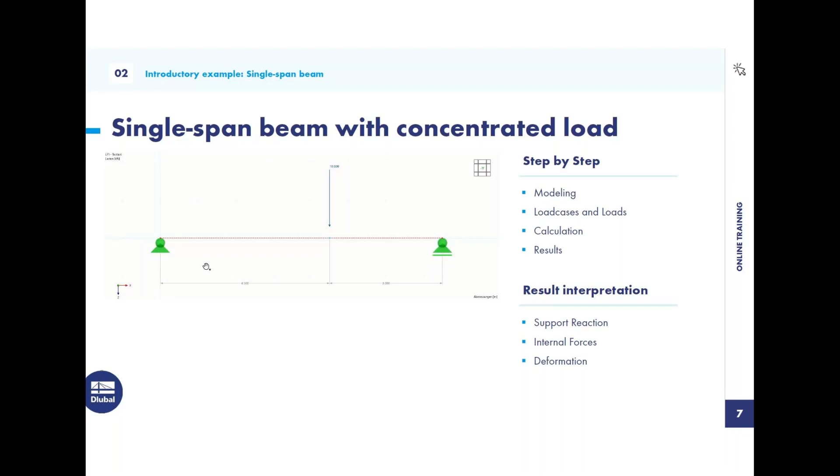So maybe let's switch to RFEM. Okay, back to the user interface. So for example, when we want to create nodes, that's the beginning of every modeling.

Nodes are the beginning, and on these nodes you can put lines or members, and surfaces need these lines at their border.

So for example, with nodes, you can start here in the navigator data and click for a new node. I'll show you - you can also use the menu basic, or nodes there, or in the table you have an option with coordinates to create nodes, or even here in the shortcut.

So you see you have different ways to do modeling, but okay, let's start. I will close this, and then let's start with a new model.

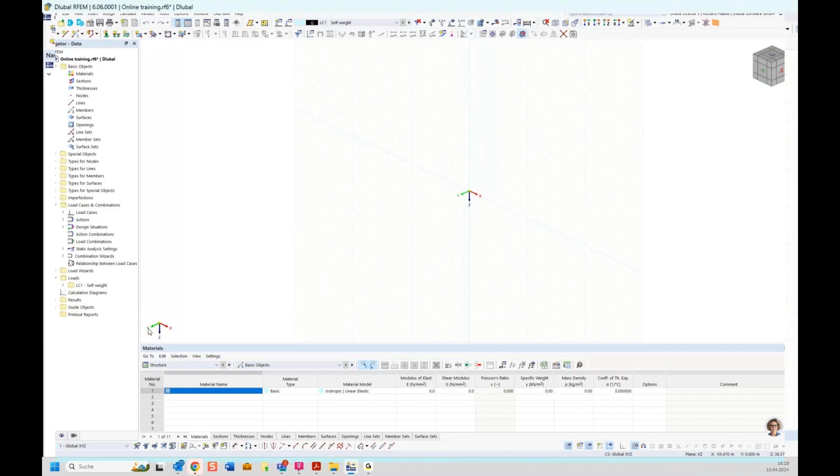Okay, maybe to the view cube before we start modeling. You can left click on this cube and you see you can switch the views. As I said, it's connected to the global axis system, so you see the Y direction when I click on Y, or when I go to X.

The same idea is here with views in X, Y, Z, or you can choose other directions. Another option is when you press Control and the middle mouse button, you can also turn around here. Okay, but let's start with the modeling.

Our system has a 7.50 meter long single span. So let's begin with the nodes. I choose the shortcut here and click on the 0,0 coordinate with the left mouse button.

Now we have our first little problem. When I go here, we see 4 meters, and here, 5 meters. But we want the node in the middle. Now we have different options.

First, I can click on this node, and in this case it fits perfectly because we start at the 0,0 coordinate. Then I could change the X coordinate to 450 and say OK. Now you see it's at 450 how we want it.

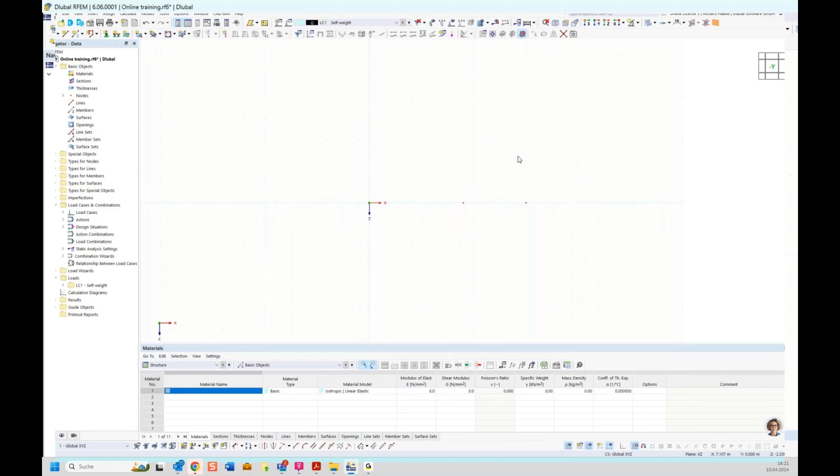Then we need the last point at coordinate 750. Let's do it this way. And maybe I set it back to the default setting. You can also do it here. So now we have 3 nodes.

Maybe I showed this before - when you left click and go from left to right, you see it in orange color, and from right to left you see it in blue. Maybe I'll continue first with a line. Let's go to this node, to this one, and again to this one.

So when I go from left to right with this orange color, for example over this line on this node, you see only this node gets selected.

But when I go from right to left, you see the line and the node are both selected. So you have these two options. The orange color only selects the object which is completely within this rectangle, and with blue you only need to touch a little of the object and it's selected.

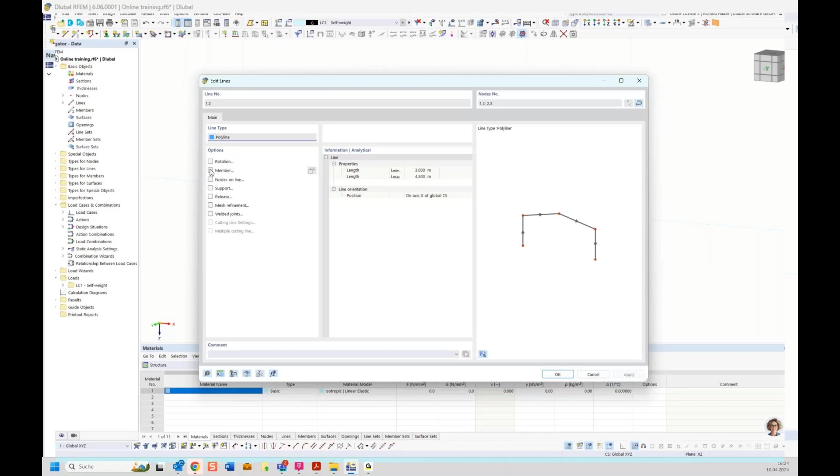So we have this line and we want to transform this line or give it some properties, and we say we want to transform this line to members. Then a new menu opens, the new member menu.

What can we see here? A member type. The beam is, I'd say, the default type. The beam gives all forces to other objects.

For example, when we go to tension, you can always orient yourself with these pictures. So we see here all forces at the beam, and for tension you see only tension forces can transfer to other objects.

Same for compression, here it's only negative forces. But let's go to another member type - here is a definable stiffness. Maybe it's interesting for you in your study time.

There you see we have a new tab here, definable stiffness, where you want to create a new stiffness type. Here you can manually define all stiffnesses - torsional stiffness, bending stiffness, and so on. Maybe it's perfect for your book exercise, and you can manually create your beam in this way.

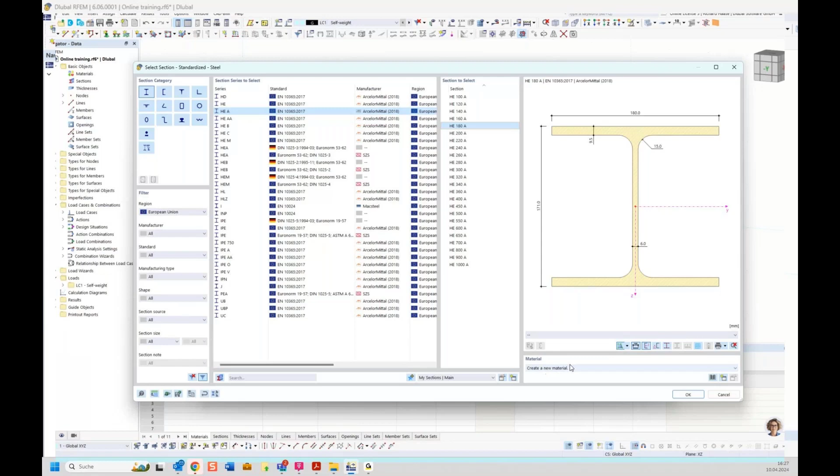Now you see this yellow color because we haven't created a material yet. So let's create one. There's again a library button.

Okay, let's say European Union, material type steel. And then you see, oh my God, so much steel. How can I find my steel I'm searching for? You see here this searching function, and let's say take an

S235, and the shown steel options are reduced. Here you can see, okay, let's take such steel, say okay, and you see the yellow switch to the blue. The blue stands in our program for steel, and we say okay.

Now we have an HEA 180 with the steel S235. Say okay, and okay. And now we can see our property-less lines are transformed to such members.

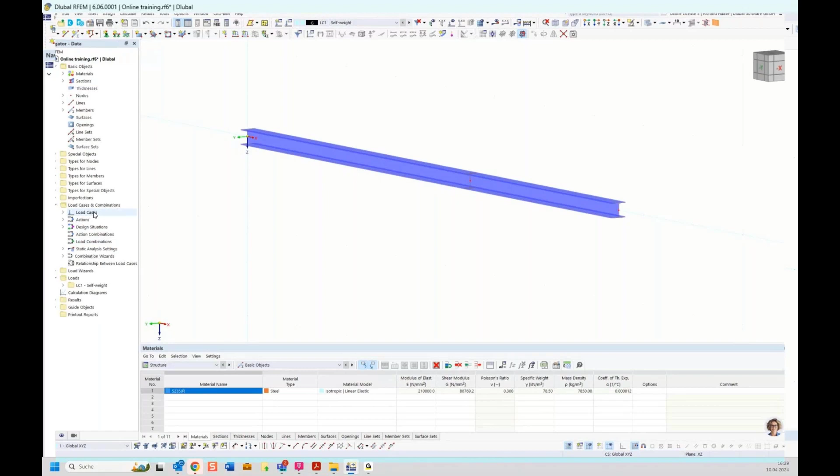Okay, so what we need are the supports we have here and the loads. But before modeling this, I will give our AI assistant the chance, and she will calculate, and then we can compare the RFEM 6 results to the results of our AI assistant.

I copy from my document. Okay, I say here a single beam with length of 7.50 meters with a single load at 450 with 10 kilonewton, and I want to know the bending moment at a length of 450. And yeah, then we start, and Mia shows us how good she is with her statistical knowledge.

So in parallel we can model the nodal supports. There, okay, when we go to this button, you see the degrees of freedom, the translational and the rotational. And yeah, we say okay, in X direction and Z direction fixed.

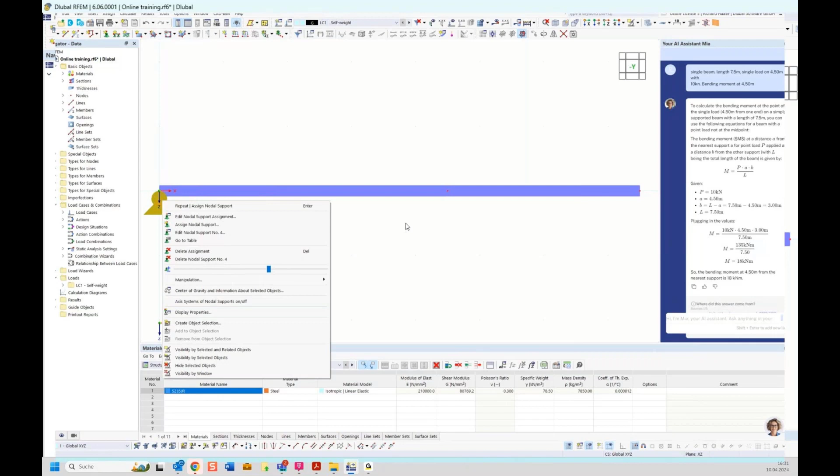We want that on the left side. Say okay. And you see, maybe when you click with the right mouse and this button, you can increase the size. And okay, we need another one. We say we need here a nodal support with roller properties, and we say this. Take our point. Okay.

And yeah, what is missing? Maybe to control the length again, you can click here for dimensions. Okay, didn't I click on my first node? Oh, that was wrong, sorry. Let's go linear on this node, and this node. Yeah, then we must see the plane, and we must choose here the second plane. Okay, that's fine. And we see, okay, our length 4.5, 3... We have our control, our 7.50 meter long single span.

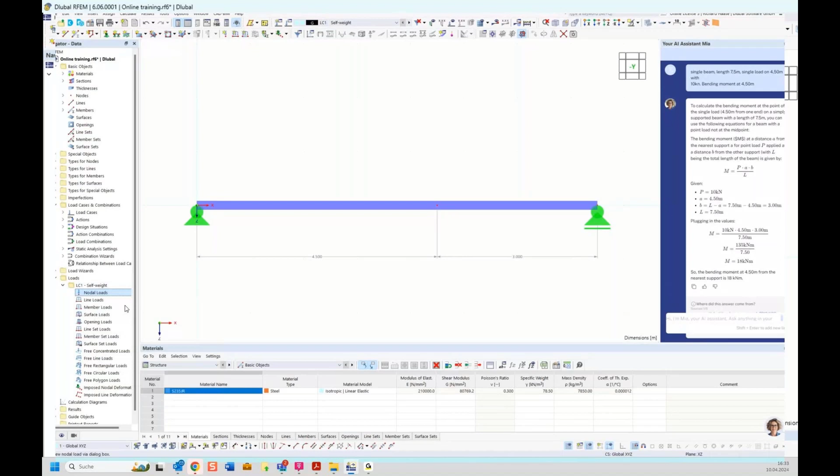And yeah, now we need our nodal load. Then we go, or we have here the option loads, nodal loads. But yeah, you already can do it here in the shortcut, new nodal load, or even loads, nodal loads. So you have everywhere, also in the table, you have the chance or the option to model in different ways. So let's do it this way, a new nodal load on our load case self-weight, and take this 10 kilonewton, that direction, or fit. Okay, on this node, say okay.

And now we will check what Mia has calculated. She says, okay, at this point with formulas, and you can control it, we should get 18 kilonewton meter as bending moment at this point. Then, okay, let's check it.

On this button, you can start the calculation. For this load case, you also have the option here on calculate all, or when you have more than one load case or a lot of load combinations and other things, you can see here you can select what the program should calculate. But okay, global deformations, you see here the navigator results is new because we have calculated and have some results here.

But we want to go to the members, internal force, and to the bending moment My. And okay, Mia says we get 18 kilonewton meter, and our program says 20.4. So who's right?

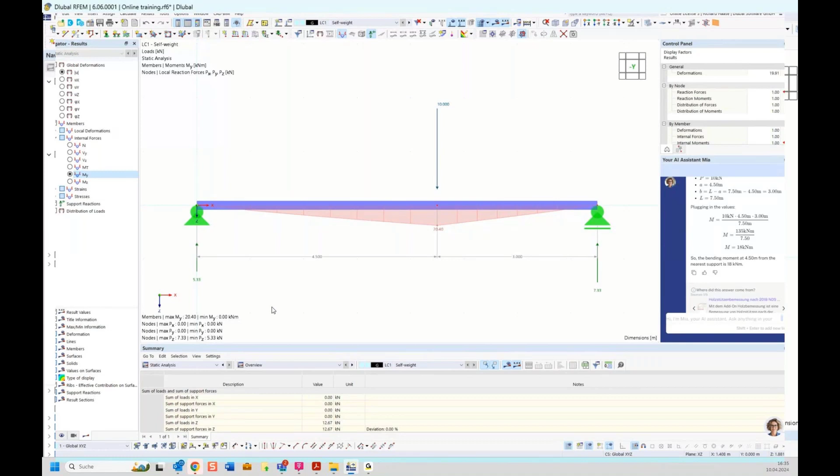We must prove some things, and the reason is why, for the load case self-weight, when we go to edit, here we have an active self-weight in that direction. So we have created our steel section, and this steel section gives its own self-weight on the structure. The default setting is that it's deactivated, but I'll show you how you can activate it.

We go to the navigator and here to the display. Then we have here the loads and the self-weight. Okay, and you see here the 0.356 is self-weight of this HEA 180 profile. And that's the reason why the results are not as expected. So let's deactivate here the active self-weight and calculate our self-weight load case again with our nodal load.

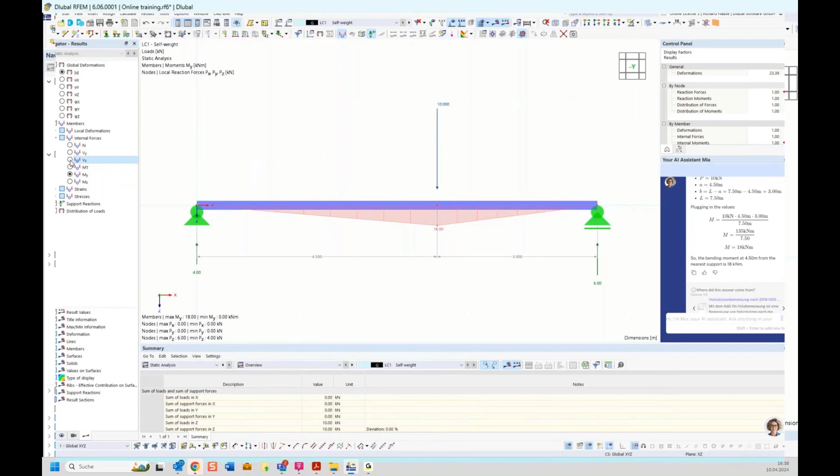Good, then we have this, the internal forces. On one side we see here the My, but we also can see here the shear forces, let's see, 6, 4, and also the deformations. And that's the options, stress strains, and you have a lot of options of the results to see them.

Okay, that's enough for my first example. Then let's go to the next, a two-span beam with alternating load positions. So we will create more than one load case, we will do 3. And then I will show you the combination wizard from Rfem 6, when you have different action types like self-weight and snow, wind, and so on, and how we combine it with the gamma and psi factors.

Okay, and another things, but let's start with the modeling of our second example. Okay Mia, thanks, then I will delete my model. And we have 10 meter of the whole length. So you have the options with the nodes and with the lines I showed you before, but there is also a faster option.

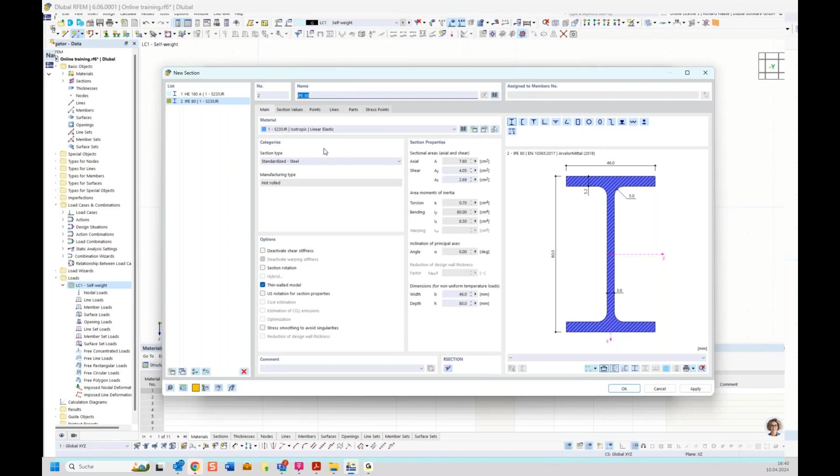Okay, we have a HEB 300, and now you see the fitting standard. Let's take this with the Euro norm, and we say OK. And from 0, we want to go to 10 meters.

You see, it's a faster way than selecting the nodes and then the lines and transform the lines. So what I want to show you is the principle of Rfem 6, because behind this member is all the time the nodes and the lines, but that's the much faster way.

Now we have a single span, but we want a two-span beam. So we click with the right mouse on this member, divide member, and the distance. Now you have the option between percent and meter, and 50%, 5 meter, that's exactly what we want. So we divide our member and have now two 5 meter beams.

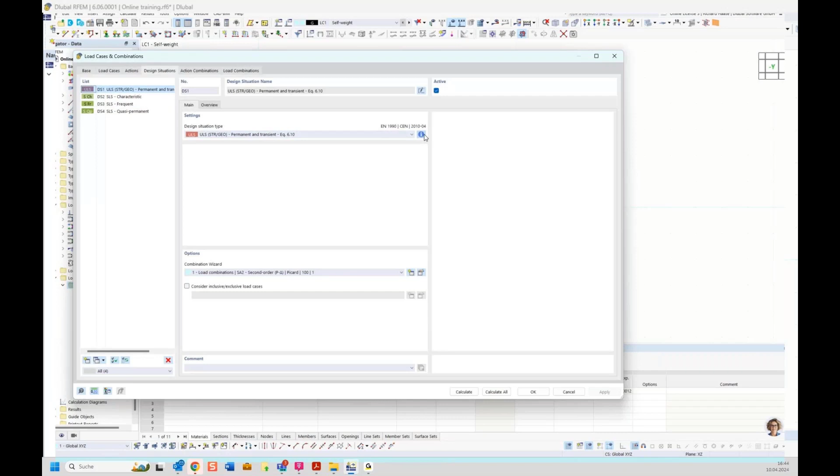Let's have a look at our ULS. So here you see Eurocode and information, the combination rules with this gamma and psi factors. Now we see he combines the actions, the A1 and A2 of our self-weight and the other action, and here the load combinations.

Okay, maybe here it's not so interesting, but I have another example where we have more than these 2 load cases. But you can see here he combines after this rule all load combinations.

Okay, that's okay. And now for our load case 1, we want to create a new member load, right click, and have 2.5 on both members. And you see, okay, he created it. And for the left, the same new member load, on the left field we want 5 kilonewton per meter, say on the left field. And now I could press the OK button, then close the load option here.

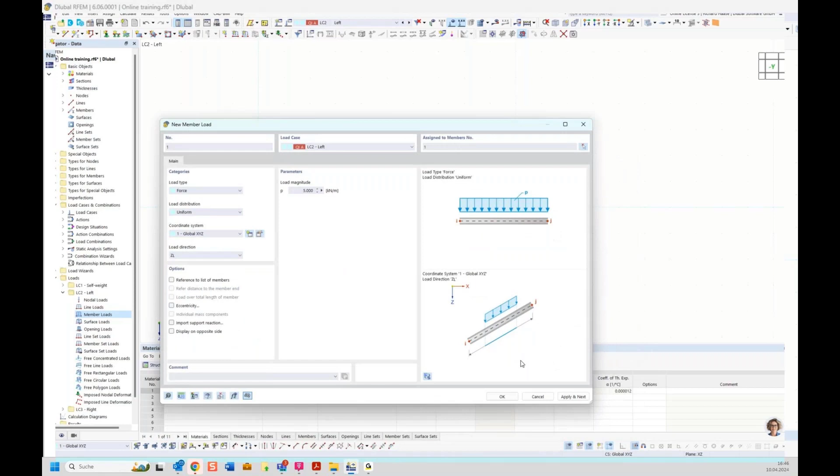But I want to continue with my right field. So when I click here, apply and next, I can see it was created, and I can easily switch to another load case. The same with 5 on the right field, and say OK. Now we are ready with our loads, and I close this with OK.

And we can control it. We have the self-weight plus the self-weight of the HEB section, but I have deactivated it - you can activate it again. Then our left field load, and on the right.

Maybe when you make controls with examples from literature, it could be possible that you get other results than in RFEM 6. And the reason, I'll show you.

You can see it in the sections. You see here this option, deactivate shear stiffness. The default setting is that RFEM 6 calculates with the axial and the shear stiffnesses, but in literature examples, most of the time the shear stiffness - they don't calculate with this kind of stiffness. So you can click it here, deactivate it, and make the shear stiffness infinity.

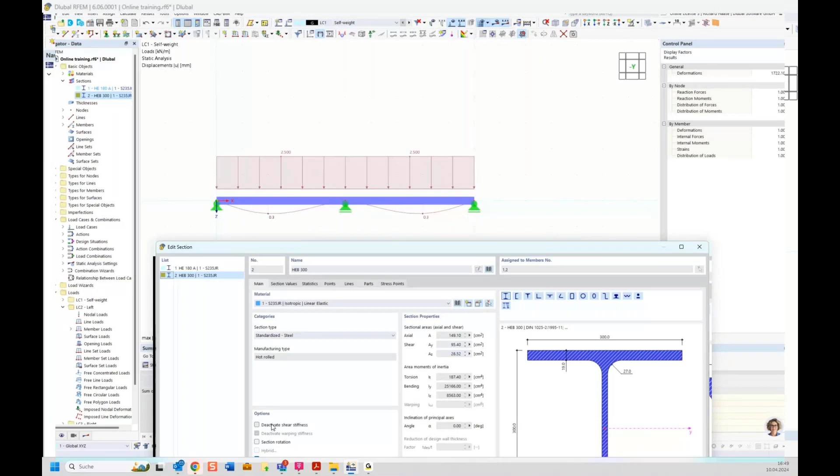So when we see the deformations, we have 0.3 millimeter here. And when I deactivate the shear stiffness, making the shear stiffness infinity, let's see - we have 0.3. Say OK. We get only 0.2. So the system gets more stiffness because the shear stiffness is with an infinite size.

So you must know this if you calculate with literature examples. Then deactivate it here, but I'll leave it active for our example. Okay, good. Then let's calculate all.

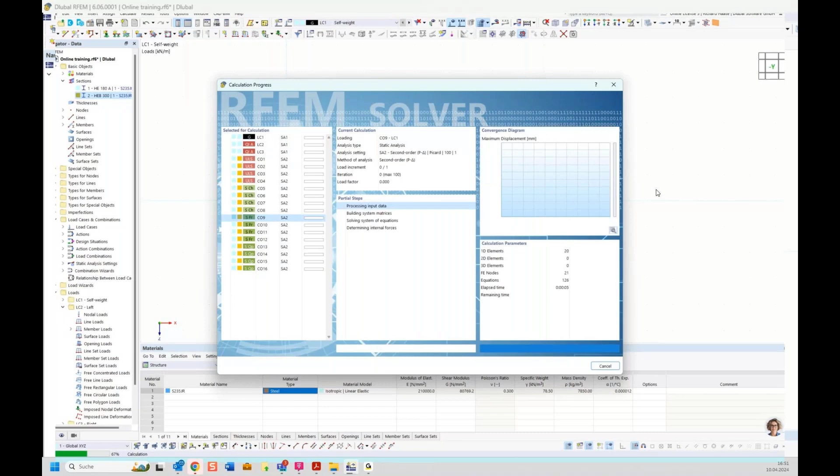And then I'll show you the results and explain something. Maybe we can choose the wireframe model here - it's then better visible.

Let's see the bending moments. We can also deactivate our self-weights, our showing loads. Okay, and we switch to our design situation. Now we see we have max and min values here, and why we get it in this design situation.

The reason, I'll show you how he creates these combination rules. Here for the ULS, you see he has 4 combinations in this case. And out of these 4, at every location, he shows you the min and max values.

So now we want to know where this result comes from - this minus 37, which combination gives us this result. Therefore you go here to static analysis, results by member, go to internal forces, and now we're at member 1.

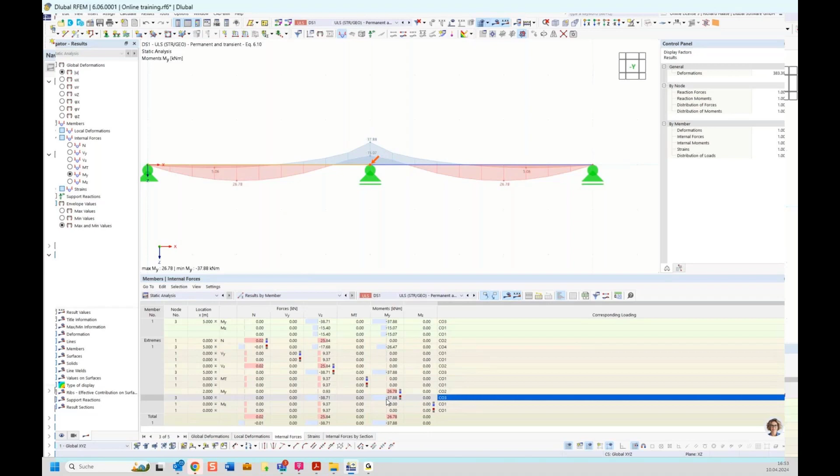That's right, at the end of member 1. Here are the extremes, and this blue and this red symbol show you the max and minimum values. So now we find our minus 37, and here is the corresponding loading. You see the combination number 3 gives us this maximum or minimum value of the bending moment.

So then let's prove it - combination number 3. Let's show the loads again, and you see we have factorized our self-weight, and here on the left and the right field loads. So it makes sense that this one gives us this minus 37 bending moment.

Okay, then let's check it for a field bending moment. So this 26.78, and you say it comes from combination number 2. And combination number 2, you see here our self-weight with load case number 2, and load case number 2 was the load on the left field.

The same you can do for the support reactions. So maybe deactivate the member results, and let's see our support reactions. Now we want to know where this 77 kilonewton comes from. Same principle - results by member, you must switch to results by node, because on this node is the support. Results by node, and switch here to support forces.

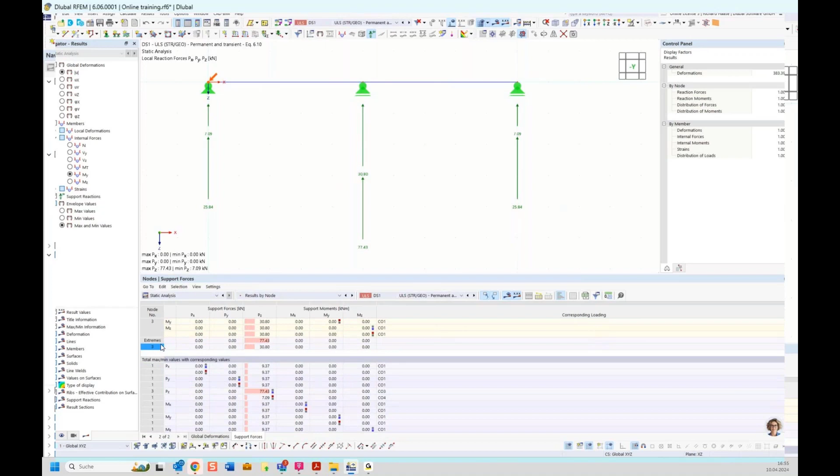Now, see here, that's number 1, and we want to go to number 3. And you can see here number 3, and here we have the 77 - also comes from combination number 3, and combination number 3 was, as you see here, self-weight, left and right field load cases. So that fits well.

Okay, that was the second example. Then let's switch to the PowerPoint presentation.

And yeah, the next example is a Gerber beam or hinged beam. This system is maybe the same as this 2-span beam, only here is a hinge, and through the hinge this 2-span beam gets statically determined. So it's a coupled system of a single span to a single span with a cantilever.

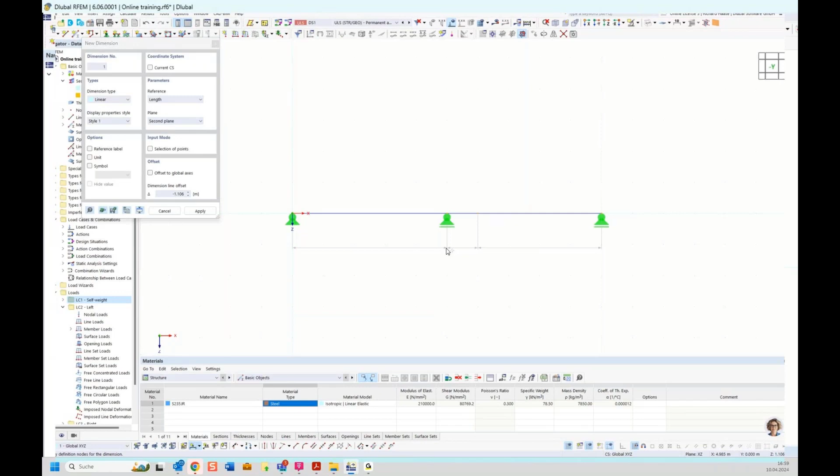And yeah, you see, say here, okay, maybe through the new GoToWebinar that the program said goodbye. Let's start again, Rfem 6, one moment.

And another point for this Gerber beam - you see the maximum field bending moment is exactly the moment over the support. And it's for the design check more easy when you have one size to choose for the section.

Okay. Oh sorry, I opened the German one. I switch back to English, sorry. One little moment please. Okay, now it's open. I think you don't save it. Okay, then let's close and make new.

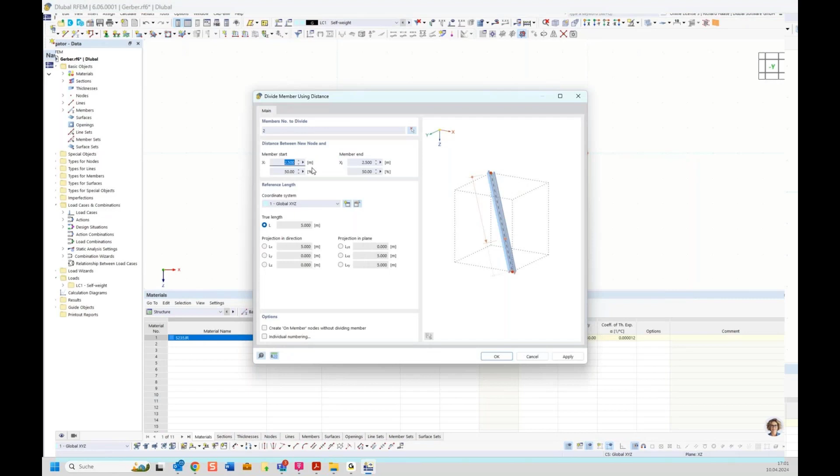It's fast, so let's say Gerber 2D. And we want again our beam - okay, so we say our 10 meter, divide this member with distance 50, and divide again with 1 meter. And our nodal supports - say here our roller, this one. Okay, a little bigger, okay.

So first, wait, okay, I will customize - oh wrong. Restore and set toolbars to default.

Okay, so now I show you how you parameterize your model. The command is here under Edit Global Parameters, so it's a little bit hidden. When you remember, I told you at the beginning that we have such a search function, and you can type global parameters so you can find it there.

Or when you're working more often with this command, you can customize your toolbar - therefore you go to View, Customize, Menus and Toolbars, and go here for global parameters. Every command you can find here or over this searching function. I want to say, okay, this global parameters I want to add in my toolbar - then left click, hold the left click, and I will add it here. So we have it fast to find.

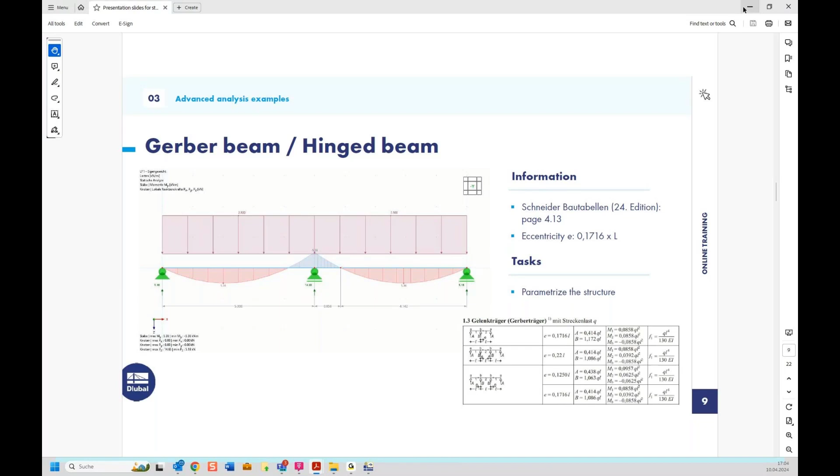Maybe - oh no, we can switch between value and formula. Let's choose formula here, and you see now our formula field here is available. Important is when you choose such formulas, you must use a dot instead of a comma, otherwise Rfem 6 gets problems to understand. So from our table book, it was 0.1716.

The field length, but this is only - it would be here, but we want to have our Gerber hinge here, so we must say another field length, and now we see, okay, it's at 5 meter, 858.

Now say okay, now we have our global parameters, and now we must connect our model with these parameters. So we go to, oh wait, before I forget, our dimensions. Okay, so good, maybe I save it - it's a good thing all time.

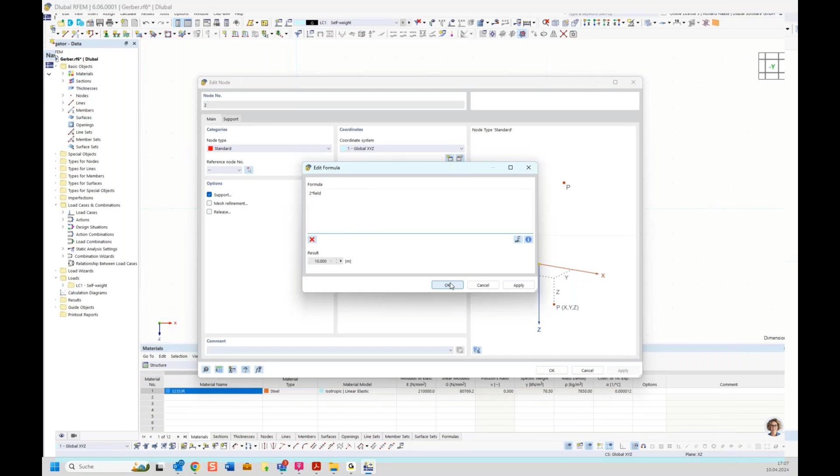Say here, and say okay, we want to edit the formula, and we say 2 times our field - that's what's the name of the global parameter. Say okay, and you see here 10 meters. That's right, okay. And now our Gerber hinge.

Let's say the global parameter again. We have our Gerber with the 5 meter span again, marked with the yellow symbol. Before it was 1 meter, and you see it switched the length.

The last thing which is missing is our hinge. Let's go to the member, same principle, we want a hinge. Important here is the direction: this is the start, and this is the end of the member.

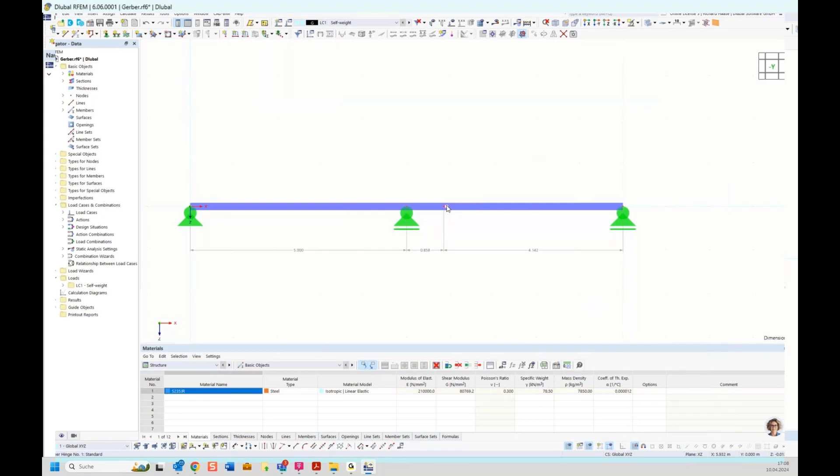So we need a hinge at the start point. We click hinge, get a new tab, and select a member hinge at the start - a rotational hinge. Say okay, and here we see our hinge. It's always the biggest size, but you can decrease or increase the size here.

So then let's check the self-weight load case, if it functions. We don't want to see global deformation, we want to see members, internal forces, and bending moment. We see here the same results, in the field and over the support.

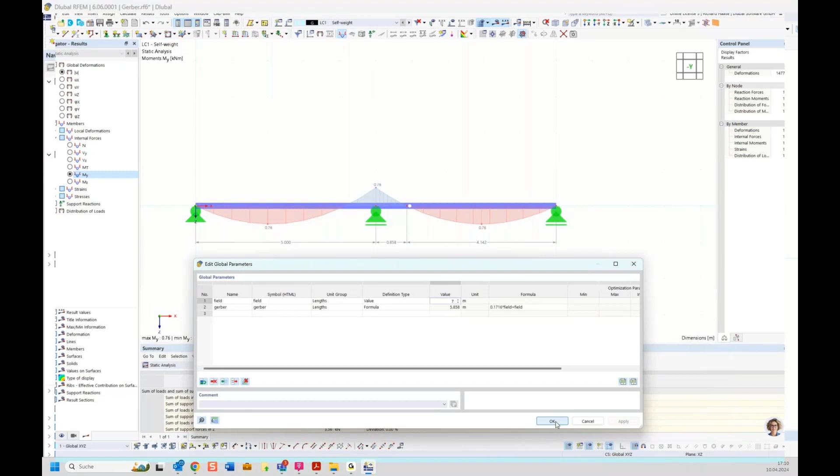Now we want to check if the parameterization functions. So when I say okay, I don't want 5, I want 7 meter field length. It's a little bit big, so say okay - you see 7 meter and 7 meter, and the hinge also springs along.

So then let's verify it. Yeah, and you see, okay, a little difference, but it's about 150, so we can say it's right.

So now you have a parameterized Gerber system, and this parameterization you can use for all models you can imagine. If you have such systems more often than one time, that's really good and saves a lot of time.

That was this example. Up to now we only used the member type. Now I want to show you a frame with a tension member and show you the effect of such member types, and also the combination - we want to model snow, wind, and temperature.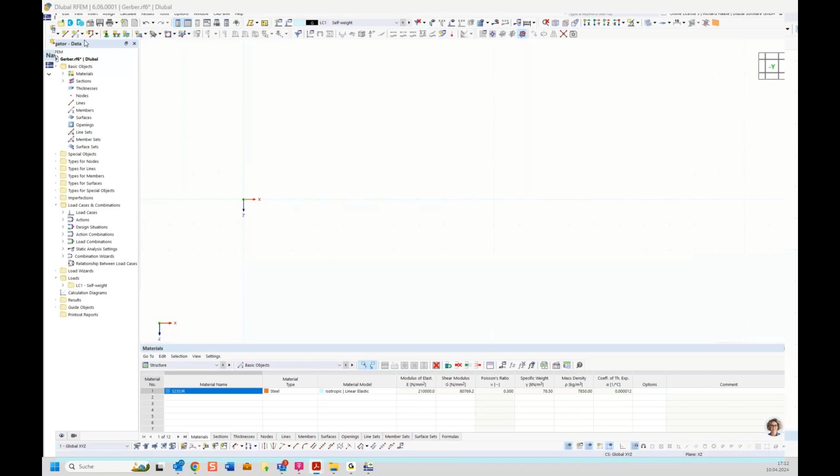So we have again our HEB 300, say okay. And 5 meter in the height, and 5 meter, and 1, 2, 3.

And now, okay, our frame is symmetric. So you have the option to draw the other beams, but I will show you an option. It's fast, but when you have a big hall and it's all symmetric, you only need to model one half and make the other here.

You can mirror the objects, and now I will show you how it functions. So you select your objects, say mirror, select objects, and you want to create a copy, and you must set the plane - you want the mirror plane as YZ. So you change it here to YZ and change a point, say this top point, and say okay - now you see you mirrored your system.

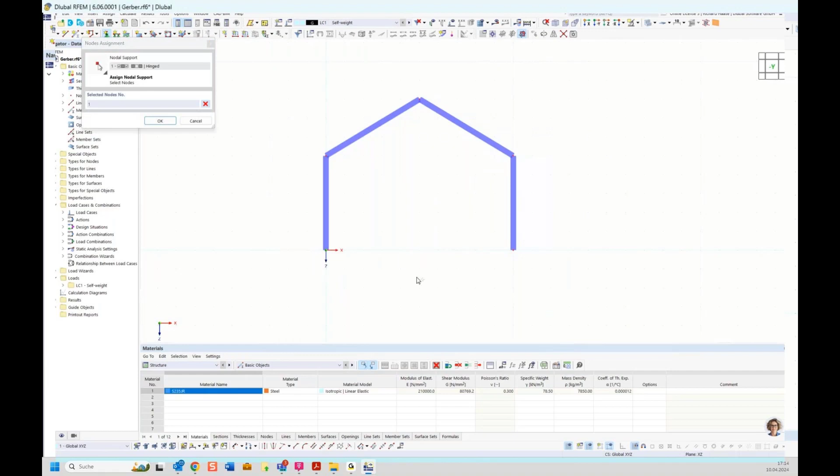Okay, then let's add our nodal supports here and here. And for the end, our tension beam - let's go again here, new single member, and node beam.

Now we want our tension member, only positive forces.

And select him here. Oh yeah, it's the wrong section type, but let's change it fast. We go to the library and want a bar type, a round bar with 30 millimeter. Say okay - it looks better, good.

Then I want to show you first the loads. Let's make a new load case.

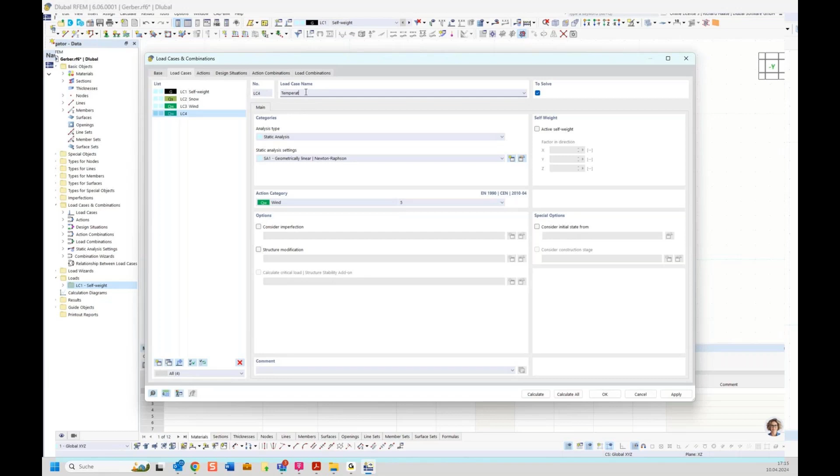We have here snow we want to have, and another wind, and you must choose a fitting action category, and another one temperature, and action category temperature.

Okay, so now we go to actions. You see, now we have here on these symbols also that fitting action category, and now it's interesting and saves a lot of time - this automatic load combinations with the combination wizard.

Okay, that's only the self weight, but look here - we have self weight, snow, and wind with a leading action category, and the not leading ones get the psi factors. So, and this is very, very good, and you have more options for fatigue or for seismic.

So different rules, and with the help of the wizard, you don't need to make it manually. It's fast, and you're on the safe side and have all combinations, all possible combinations.

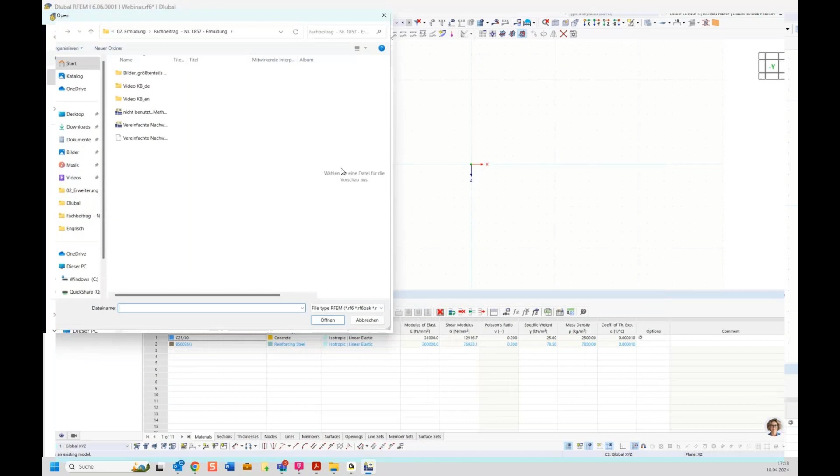Okay, restore. I hope he saved it. Okay, then let's fix modeling it again. Wait, maybe I have it here. Gerber, maybe. Okay, then I have some right materials. Okay, so we had here our 5 meters.

I started new, must depend on this new GoToWebinar. Normally it doesn't crash. Cannot be moved. Then I will try it again, and it's away again. Okay, one more time.

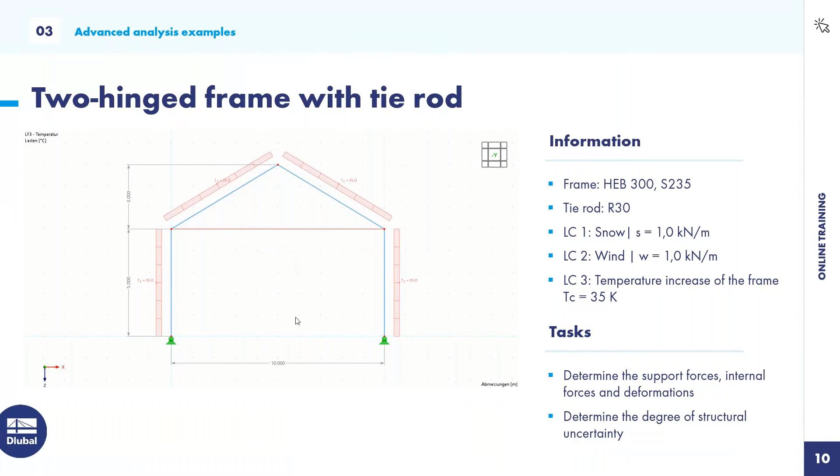These truss members will only transfer axial forces. This secondary red truss structure acts as a suspension for this single span beam, which has a very high span and would fail otherwise if we wouldn't add additional supports by this secondary support structure.

Okay, let's go ahead and go to the program. I opened a blank model. The only objects that I already included in this model are material, an S235 mild steel, and an HEB 300 section. This was already defined by Richard, so you know how that worked, and I won't go through that again. The model is also still based on a 2D type model, so we will not yet go into the three-dimensional realm.

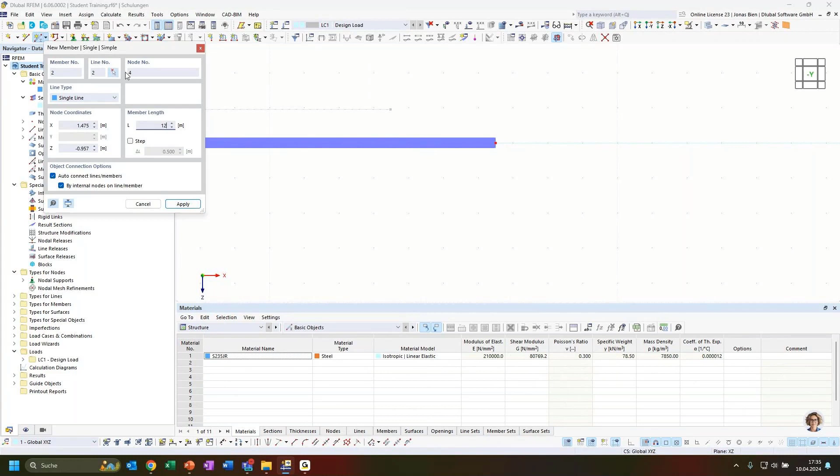Alternatively, one other solution would be to adjust the grid or manually change the coordinate of the second node. There are multiple ways to define the beam at this exact length.

Then we add two additional nodes on this member where we want to connect the vertical truss members. So I divide this member by two intermediate nodes, and I set the option to create nodes on member, because I don't have to divide this member this way.

It can stay one single beam element. Then now, how do I define the secondary truss structure best way? One simple way - let me show the task again. The vertical distance of these two nodes is given as 1.40 meters, and the vertical distance at the member ends would be 2.30 meters.

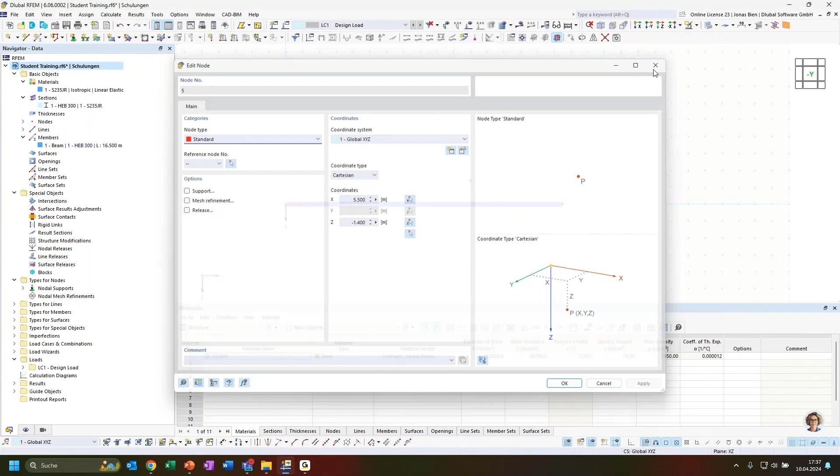So in order to achieve this position of the truss end nodes, I can use my copy function. I think the best option would be to take the nodes on member, the intermediate nodes, select them, go to the copy function, and copy these nodes in Z direction by -1.4 meters, making sure I want to create a copy. Because these nodes were originally nodes on member, when I copy them away from this object, they are directly transferred into a node of type standard. Now I could define my truss members between the two nodes.

What I could also do, and I want to show you that alternative option - here it doesn't make so much sense, but in larger structures that's a very nice feature you can leverage to speed up a modeling process. So I again select the two intermediate nodes, want to create a copy, and then in the additional options I say I want to step the links, which gives me the option to not only copy the nodes, but to directly create lines between the two nodes.

And I can also on these lines directly create members. So when I hit OK now, it would copy the nodes, create lines between the base nodes and the newly created nodes, and create members. How this member should look like, I have to define. I could either give a template member from my structure, or I define a new template, and that I want to do because this definition of this member should differ from the first beam I defined.

So I want now to have a truss member, and the section shouldn't be HEB 300, but it should be an IPE 200 beam. So I create a new section, created via the quick search up here, and create a new section number 2 of the type IPE 200.

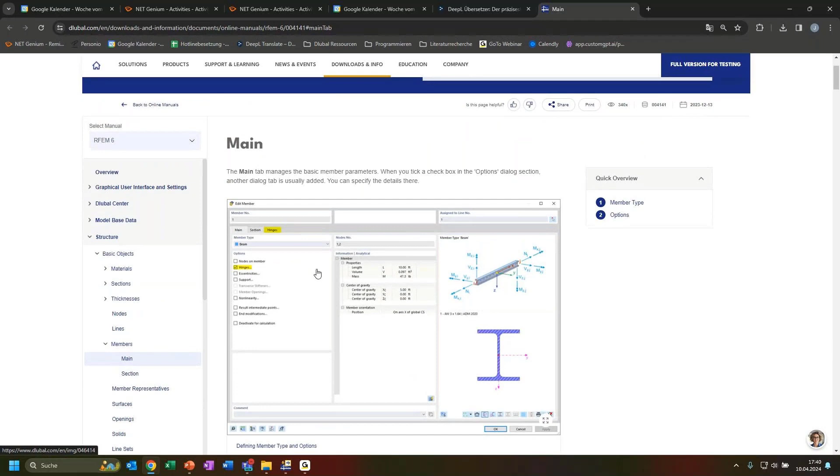In all of the dialogues you find this little box in the lower left corner which you can click, and it will open our online manual - not only the correct online manual for the program you are using, but also the correct section with respect to from where you are opening it. So I would directly come to the edit member dialog, and I could quickly browse through the different member types and get additional information.

We also have linked additional webinars or articles that are relevant for the manual. So this is a very nice and quick way to get additional information.

All right, so the truss member is like a beam that has moment releases at its ends, and I will use this member type for the secondary support structure. Now I have finished the definition of the beams that I want to create with this move copy command, and then I click OK. Now you can see with the copy command for these nodes, I have directly two additional members, and I don't need to do anything with this - that's already quite nice.

And then in the second step, I would take the outer nodes at the beam start and beam end and copy it minus 2.3 meter in that direction.

I could also, like if I have the dimensions here in this PowerPoint presentation where I have 1 meter 40 plus 0.9 meters, of course I can calculate this in my head, but if I don't want to, or if the numbers are not that even or easy to sum, I can type the mathematical operation in this input dialog, and it will calculate the correct value for me.

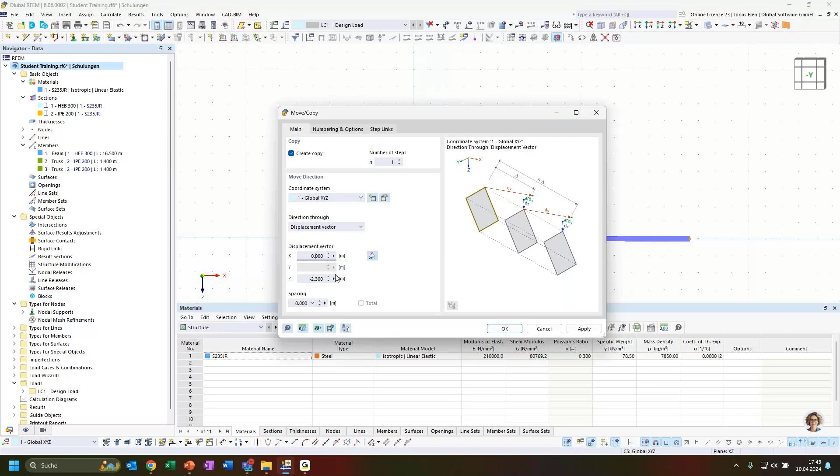What is also nice, I can enter values with units. So if I type in 2,300 millimeters, it will automatically convert it to the unit that I use for this particular input. So this is very smart.

But in this case, I wasn't very smart. I didn't want to create additional members between the 2 nodes that I copied. So I just delete these by selecting them and clicking the delete button.

And the remaining truss members that define my secondary support structure up here, I can create by now linking the 4 nodes. Oh, I misclicked, but no problem. I can just drag and drop the end node of this member and release it on the node I created before. So that's also no big deal.

So now I have defined all the members, and I can already see that they have different cross sections when I activate the rendered view. Up here you can toggle between different display modes for members: a transparent rendered mode, the wireframe model, and the solid rendered mode.

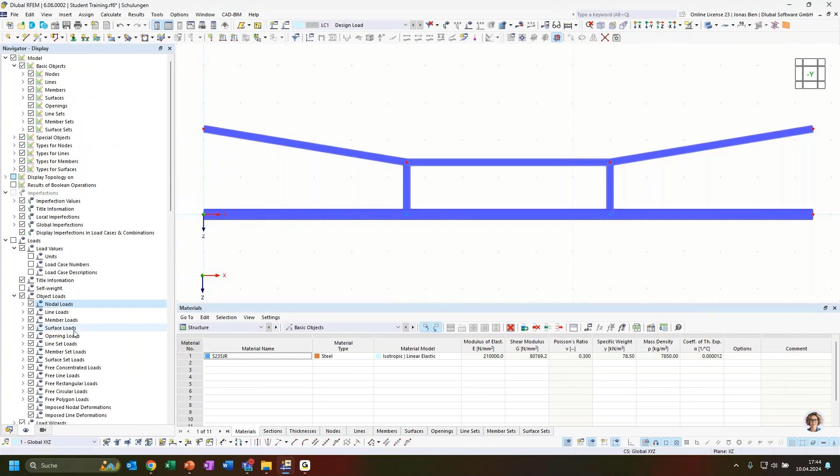But sometimes it's hard to see if there really are different sections. They could have the same height but different section dimensions or whatever. I want to show you another function that allows you to easily distinguish between different sections or beam types. You can go to the Display Navigator tab, the second in our navigator, and under colors of rendered objects, you can color the beams or members by their properties.

For example, you can color it by member type. If I activate that, I see that this lower member is now colored in blue, and blue stands for beam member type, and the rest of the structure is colored in green, which stands for truss member type. I can also do that for section, to highlight that I have different sections in my model. On the right side in the control panel, I automatically get the corresponding legend for the current setting. This is quite nice to get a better overview of the elements and objects you've defined in your model.

So what's missing now is the load and the supports. Let's start with the nodal supports. I want to add a nodal support at the start of my beam, fixing it in Z and X direction. I want to apply the same boundary conditions to my end nodes at the upper support structure, this secondary truss structure.

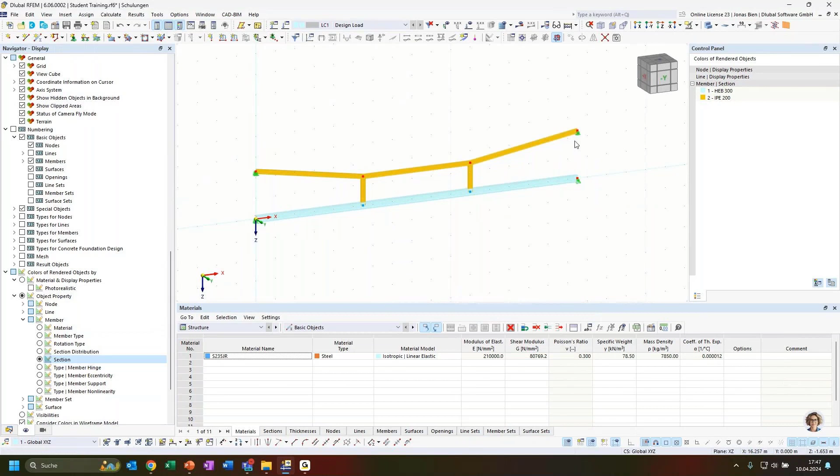If I applied the same boundary conditions to the upper support structure, it wouldn't make a lot of sense, because here I need this horizontal restraint to actually make the upper structure stiff.

I can imagine that now, in the last step, I load my lower member, this beam member, with a vertical load of 15 kilonewton per meter. I just do that right now.

Then the secondary truss member structure above acts like, or provides, some elastic supports at the thirds of the single span member. The stiffness of this support depends on the stiffness of the nodal supports at the ends, on the truss member stiffnesses, the length, and so on. If these weren't fixed in the X direction, they would just move towards each other, and I wouldn't have any additional support provided by this upper substructure.

All right, so now everything is set for the analysis. I've defined my members, I've defined the load, I've defined the supports. So I can now run the simulation. I do that by asking for the results, but of course I don't have any results yet, so it automatically calculates.

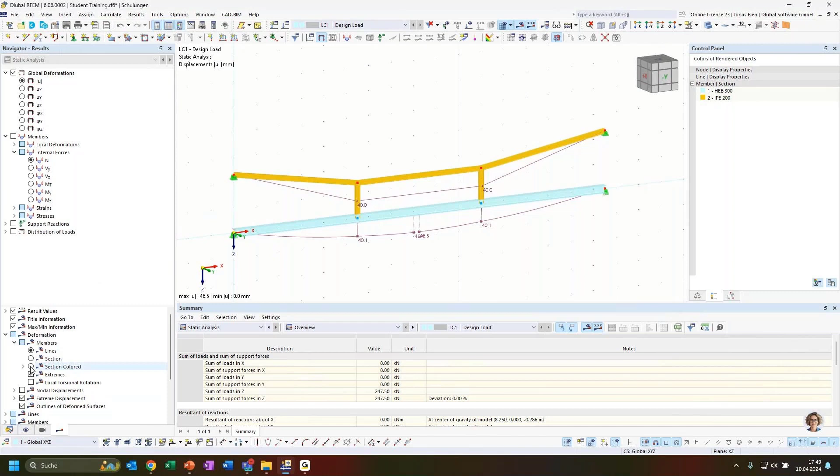I mostly like to analyze member deformations by using this option to show the sections colored, because in this way I not only get the deformation of this wireframe model, but I can directly see the intensity of the deformation by the plotted color. Moreover, I could already see if there would be some torsion in the members by the display of this cross section. Whereas in the wireframe model, I can only see the overall deformation at a certain point along the member.

So that's also useful. And what I see now is that I have around 45 millimeter maximum displacement at a midsection of the single span beam down here. And of course, the upper support structure is also deforming with it. It's elongating in these truss members, because all of them should be under tension, and we can check that if we proceed and go to the internal forces in our system to better read the forces.

I go to the wireframe model and deactivate the rendering, and now I can see that I have very large tensile forces in this above supporting structure, and a vertical normal load of 75 kilonewtons in these vertical members, and these would be the so to say support forces for these intermediate supports of this single span beam.

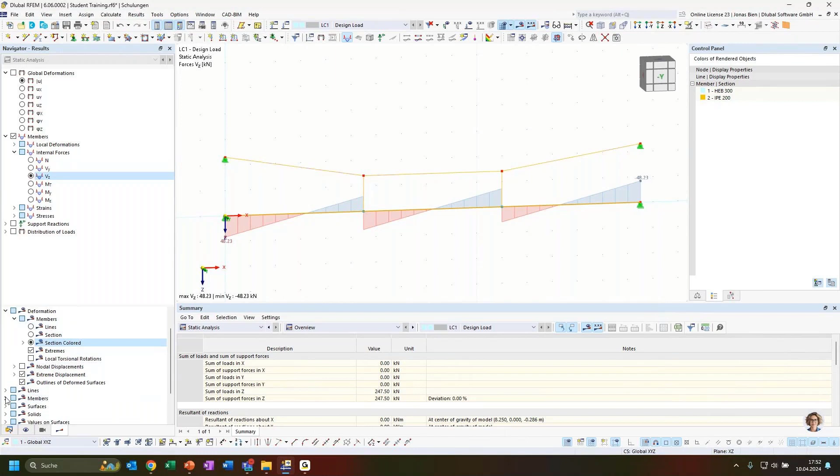But the exact values I couldn't read from this diagram because I only get the extreme values and the values at the end of each member. However, the results are calculated on many more points as indicated by these dashed lines here. And if I want to see all values, I can go to these results options under members and activate the option to show all values, and then I could read the exact value between the left side of this intermediate node and the right side of this intermediate node. So that would be quite helpful in this case.

Another way to further investigate the results in detail, and maybe to compare different result values, is to open a result diagram. Therefore, I just select a member and can use the toolbar to access the result diagram, or I could also right-click on it and open the result diagram via the context menu. And if I do so, I get the results that I want over the whole member length.

Just as you can see here, it's the member length or the actual coordinate of this member that is plotted up here. So it's 16 meter 50 long, and along this length I can now go into the design details and check every value, where it not only gives me the values at the interpolation points, but it also interpolates between those result values.

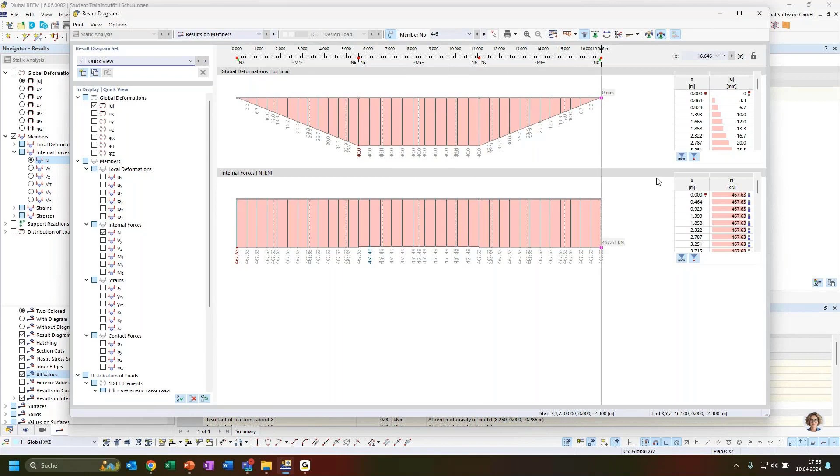All right, that's what I wanted to show you in the context of this particular example.

If there are no open questions, I would proceed with the next one. So I delete the complete structure and show what task is next on the list.

So the next exercise would be to investigate a truss structure, and it says it should be an ideal truss structure, or we want to model an ideal truss structure. What does this actually mean?

It means that we have only axial forces in the members, and for this to be true, we need some implicit assumptions: that we have perfect hinges in the connection of our truss members, and that we have no imperfections in our members, so they are straight and have a perfect geometry.

We don't have any eccentricity in the connection of the members. In reality, it is often the case that the system lines of the members, for example in this node that I highlight here between the upper chord and the diagonals, are not in line. Often it is not possible to avoid that.

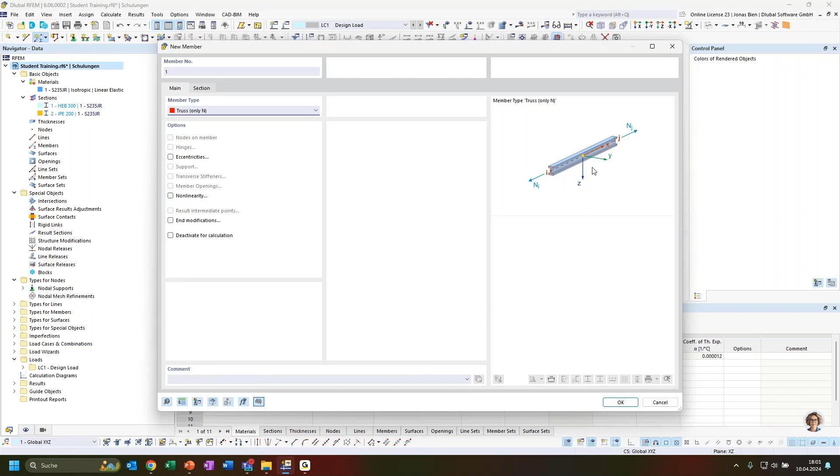And in this case, we said that we want to also neglect the self weight of the members, so I choose the member type truss only N. This will only transfer axial forces and no shear forces due to self weight of the members, for example.

The section will be HEB 300 again. So with this being said, I now get this dialog to generate my member, and for our particular purpose I can choose the option to create this member by the definition of length and direction.

If I click this and go to the working window, I see that attached to my mouse cursor there's already a member pointing in Z direction with a length of 1 meter, and I could place it somewhere in the model. But in my case, the length of the member should be 3, and the angle in the work plane should be not 0, not 90, but 90 plus 60 degrees.

So I can calculate within this input dialog, and then my member has the correct length and orientation, and I can set the origin as the starting node and place the first diagonal of my truss.

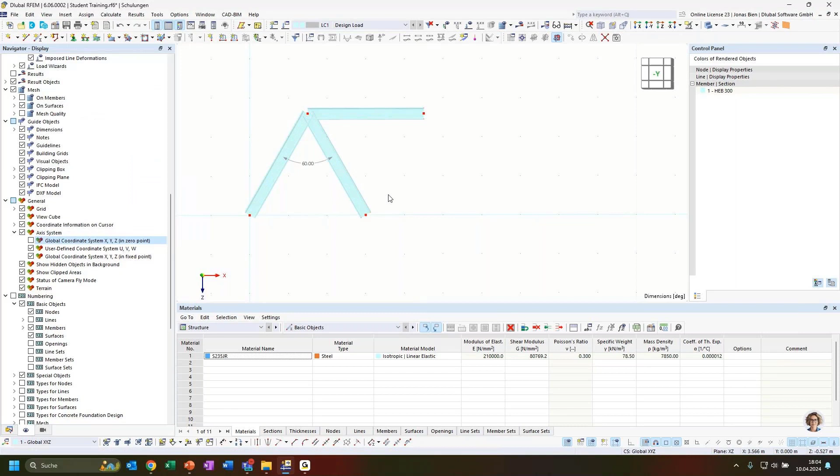Okay, so that would be a good starting point. Of course, now I need to add this substructure or additional diagonals and upper chords to the model to finish my truss structure. And to do this, I can use the drag and drop function.

So I can just select all the members and nodes I have so far defined. Click next to the lower left node, because that would be the node that I want to connect when I copy this piece of the model, and then hold the Shift and Control button at the same time on my keyboard, and then with left click, going somewhere in my working window, I can copy this substructure, and I can also snap to the existing node or some grid points to place this substructure another time at this location.

And I want to connect it with the first one, so I could just do it like this, and I would have 3 additional members very quickly.

I could also just choose these 2 diagonals, copy them the same way, and that would be a big step towards the finished truss. I can also copy the upper chord the same way, just selecting the upper 2 members.

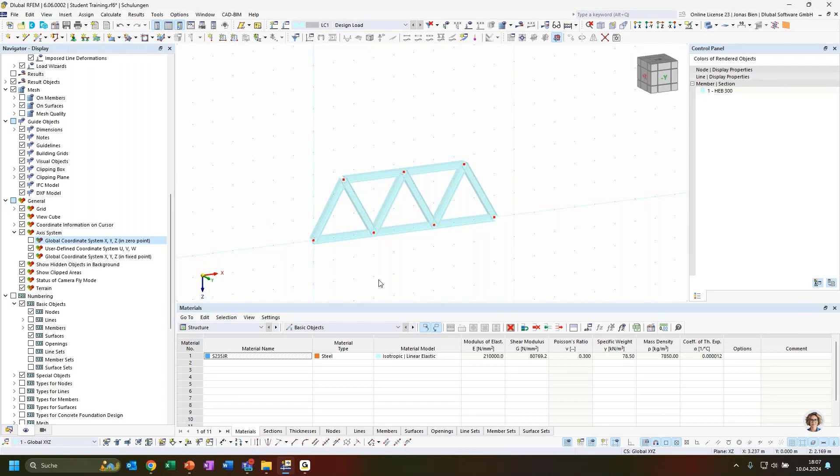So that just leaves me with the missing vertical truss members that, so to say, divide my triangles by half. So I generate additional truss members, and I create them by selecting this upper node of my first triangle, and then I can snap to the midpoint of the first member of the lower chord. There is by default a snapping point that I can use to generate this truss member.

And once I have defined the first one, I could again use drag and drop to copy them to the remaining places or locations where I need them. Or in this case, because I need to copy it 4 times, I can do it even quicker by just using the copy command, because here I can copy multiple times in one operation.

So I can create 4 copies and just need to define the displacement vector - from where to where should it move and copy the existing or selected member or structure. And I can define this displacement vector by just clicking 2 nodes. Now it will copy this member 4 times, and the distance between the copies will be 1.50 meters in X direction. I hit apply, and with one operation, I get all the vertical members that were left.

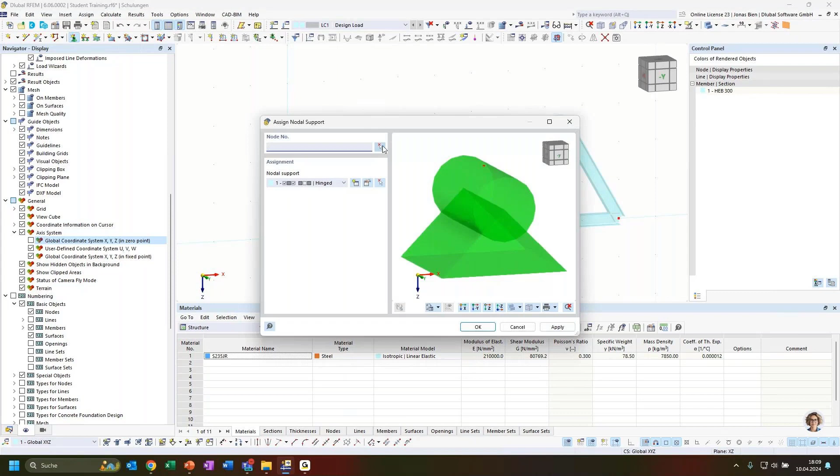So I have now restraints in my model. It's statically perfectly determined this way. And then I need loads. In the description of this task, it said we should apply 10 kilonewtons to the first and the second top node of the triangles, and a load of 20 kilonewton to the last node here, in Z direction, of course. And yeah, that would be basically it.

This is a bit hard to see. I can also switch to the default display properties. I can always go back to the default options if you've modified something here and can't find a way to turn it back, you can just set everything back to the Dlubal standard. That would also help you in most cases to get a good default setting for your display, by just clicking here in the navigator and right-clicking it, and you get the option to reset to Dlubal standard.

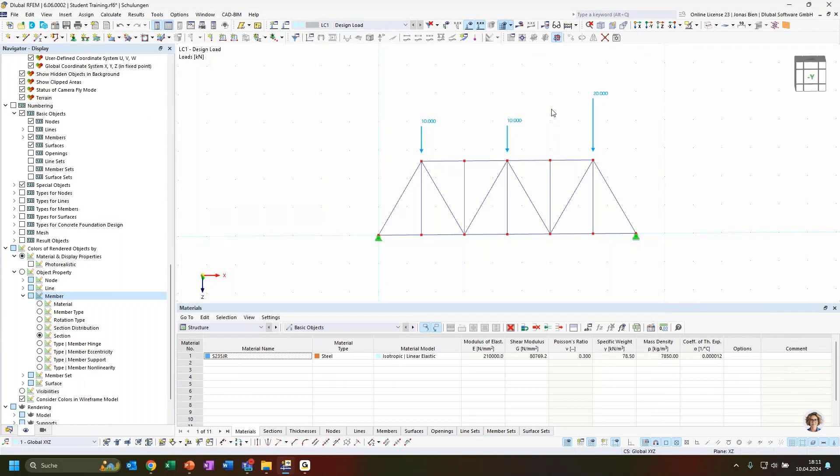Okay, now let's solve this model with the applied loading and try to solve the tasks that were asked. So again, we can check the global deformations, but nothing too crazy happens here. Everything that we see is expected, I would say.

But the interesting part is when we look at the internal forces, and explicitly we can maybe just to make sure that we now have only axial forces in the system, we can go through them and we will find that we only have values for the internal axial forces, so for N, and these ones we want to investigate a bit more deeper. So the first task was to determine the support forces.

So for evaluating those, I have to switch on the display of the support forces here in the results navigator. One good way to check your model for sanity would be to compare the sum of the support reactions with the sum of the external loads you have given onto the structure. So on the left side, we have 16.667 kilonewton. On the right side, 23.33 vertical reaction force. So they would sum up to 40 kilonewton. And this is also what we defined as an external loading on top of the upper chord.

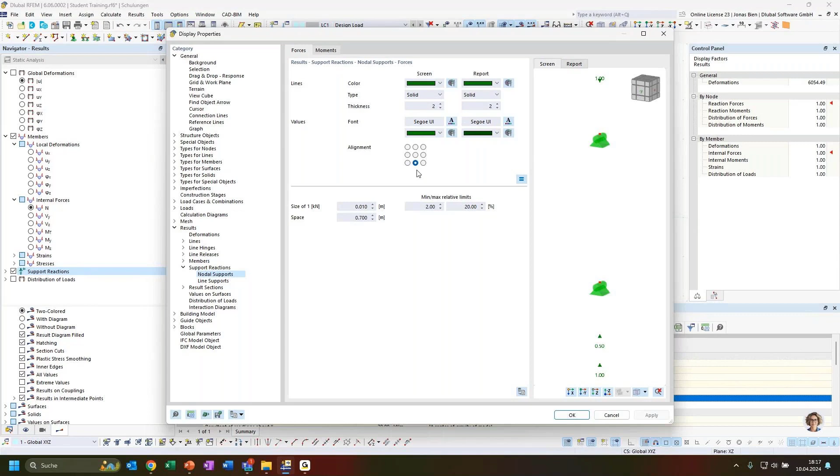But for the support reactions, we don't have this feature. So if you want to go a bit deeper and change the size of those arrows, or you can also change the color or the font, you can go to display properties, options and display properties, and you would find under results, support reactions, nodal supports, settings to manipulate the size of these arrows. You could change the thickness of these arrows, the color of the arrows or of the text, the spacing between the arrows and so on, and save that. You could also generate templates with these particular graphical settings and load them in your next projects. So you can save and load templates for these display properties as well, so you don't have to do this for every model over and over again.

All right, so then I would proceed with the next example, and that will also be a truss structure, but this time we don't want to model it by hand, but instead we want to use the blocks feature to generate such a structure. And I want to explain you what is a block, where you can find it, and what it can do for you, and how it can increase your modeling speed.

So for standard structures, we offer large libraries of pre-generated structures or substructures, which are called blocks. And you can access them, for example, via this block manager function here in the toolbar, or you can find the blocks under special objects. And if you want to use those blocks, you need to work in a 3D model type, so it asks me to change the model type to 3D. This is of course okay.

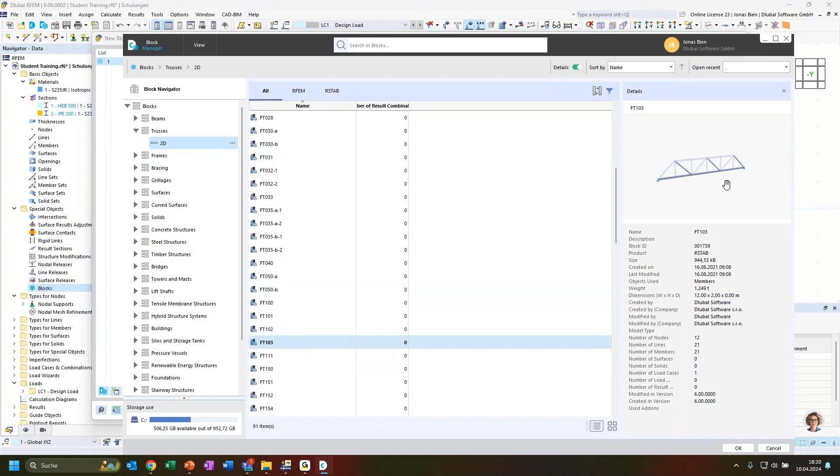And now we want to select a new block from the library, and this is where you end up when you go over this block manager button up here. Then this huge library of predefined structures will open, sorted in various categories. For example, we have those 2D trusses here in this category trusses 2D, and the first one in this list would actually be the one that we should import into our model. But there are, of course, several ones with varying complexity. You could also find the truss that we just defined manually here in the blocks manager, but the blocks manager is not limited to trusses. We have also complete structures that you can import. We have bridges, for example, predefined that you can directly import and play around with.

And the best part I want to show you about these blocks, when I select the truss type that we want to choose, you can see that I can now say where I want to insert it in my model. But this block is also completely parameterized. Richard showed you before how you can use global parameters to parameterize dimensions of your model, but these are already parameterized. So before I generate this block, I can modify, for example, the number of bays. I can use 8 instead of 6, so it would directly add 2 additional bays. I can alter the length of the outer bay and the inner bay. Actually, they should be 3 meters, so I directly put in the correct values. The height should be 2.5 meters, and it directly modifies the block geometry in the preview.

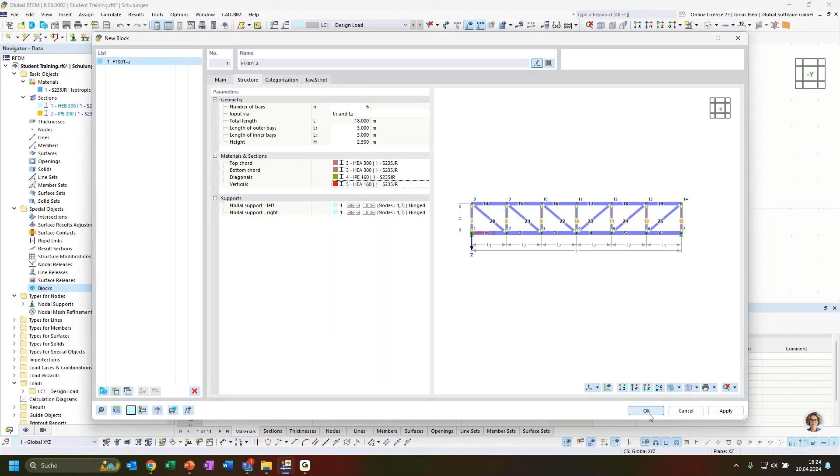And the verticals or posts should be an HEA 160 section. I can also alter the support conditions, but I will leave them as standard, the default settings for now. We don't want to calculate anything on this model.

I just want to show you how to work with these blocks. So when I apply or press OK in the block dialog, this block is actually then, with the configuration that I made, inserted into my model. When I show the sections by color, I can also directly see that my sections are correctly assigned in the model.

I also have the dimensions that are directly taken to the model. So that is a very easy way to generate such substructures.

And I could now generate multiple of these substructures, for example a combination of such frames and trusses and frames, to create a complete industrial hall made of steel. So that would be quite easy.

These blocks are still a block object, so I can still find this block that I just inserted here under the special object blocks. And I can still use the parameterization to change the objects of this block. So I can still alter the number of bays, and it will directly update it in the model.

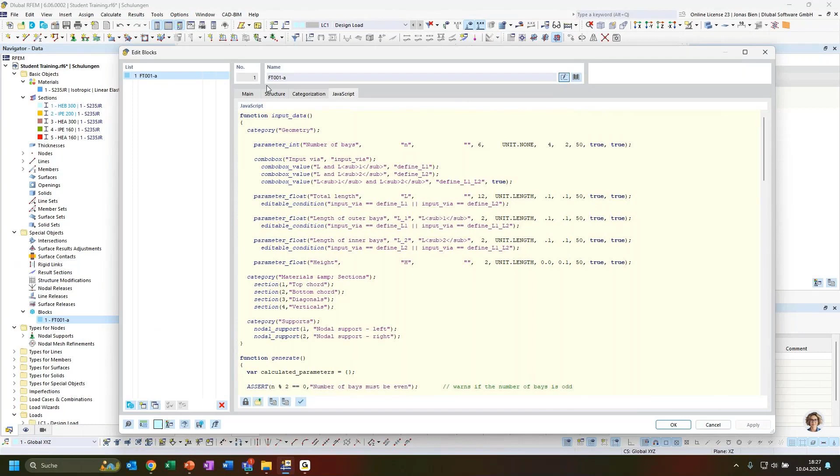What we also see, you might have seen it earlier, is that all the objects generated by this block are listed here in this pink color. That means these objects are generated objects, they are dependent on something else. In this case, those nodes, lines, and members depend on this block. So whenever I change the block definition, the definition of the nodes, lines, and members will change automatically.

If I want to release this dependency, I can do that by clicking on the block and selecting explode. Then it will delete the block but leave all the objects and make them editable. So now these objects would be regular objects that I could have inserted myself, but of course now you cannot use the parameterization anymore.

And one thing we should do with this model, I think, before we leave this example: in the block, these diagonals and posts were defined as beam members with hinges at the end to release the bending around the strong axis. But one task was to replace these beam type members with truss members.

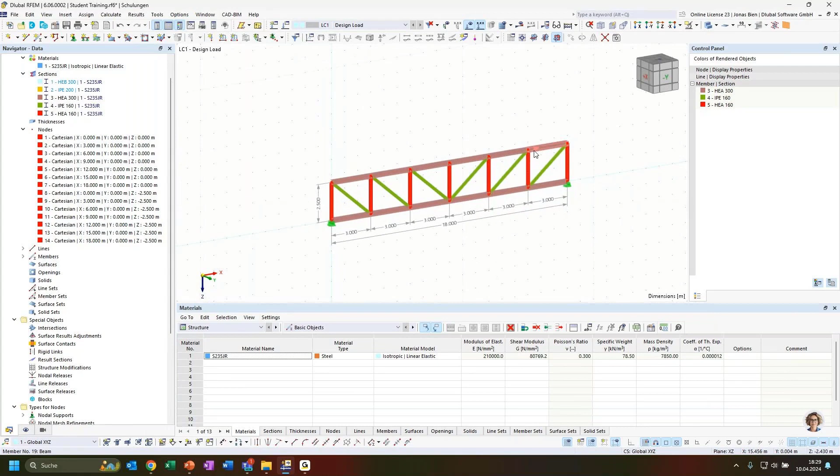That leads us to the two more advanced topics of this online training session. We want to now tackle a more theoretical topic, which is we want to investigate the differences between first and second order theory and how we can change between these analysis methods within our software.

Because time is running a bit, from now on you should just observe what I am doing here and listen to my explanations. If you want to, after the training, model it yourself and try to achieve the results yourself, you can come back to the recording and do it step by step. Pause the recording if you need more time to model it or understand it. Since it's a more complex topic, you should focus on the explanations I'm giving.

To the background: so far everything we have modeled and calculated was calculated under the assumption that we have a linear deformation theory. So the equilibrium between internal and external forces was derived on the base of the undeformed structure. That's not always a valid assumption. For very slender or flexible systems, we usually have higher deformations, and these deformations of our structure can alter the actions within the column, within our structure. So there is a direct influence of the deformation on the loading, and this can be addressed by using a second or third order theory for the calculation.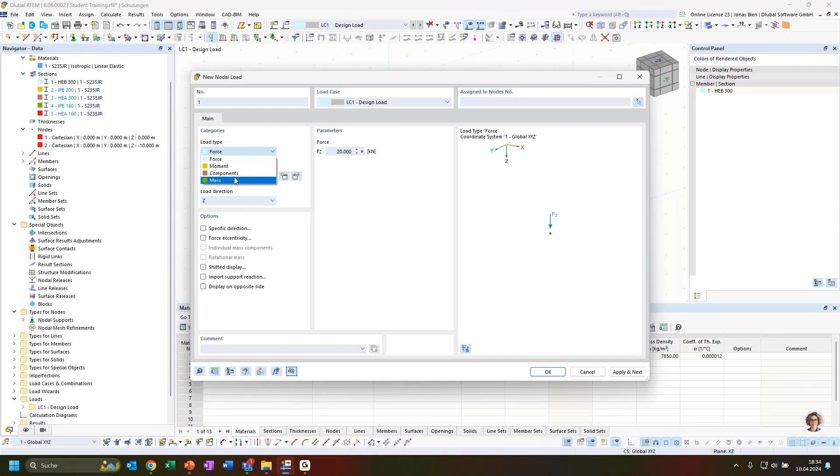Then we need the load at the column end. That could be a nodal load, and we should apply loads in 2 different directions. We could use 2 separate definitions for the nodal load, one for the load in Z direction and one for X direction, but we could also switch to the load type components, where we can directly input each force parameter and moment value at the same time. So I just need one definition for our loading: a vertical load of 100 kilonewton and a horizontal load in X direction of 10 kilonewton. When I assign that to the column end, we see that this load is now displayed at the column end.

Now, in the first step, let's see what the results would be using first order theory. So we just use the default settings for the solution that we used along this training session and check the results. It should be quite obvious, at least when it comes to the internal forces. Of course, we have an axial load of 100 kilonewtons in compression, which does not change over the height of the member.

Then we have a shear force in the strong axis of 10 kilonewtons because of this 10 kilonewton at the column end in X direction, and this also generates a bending moment along the length. At the column base, this results in a bending moment of 100 kilonewton meter, which is the product of 10 kilonewton times 10 meter height of the column. All right, so nothing too fancy.

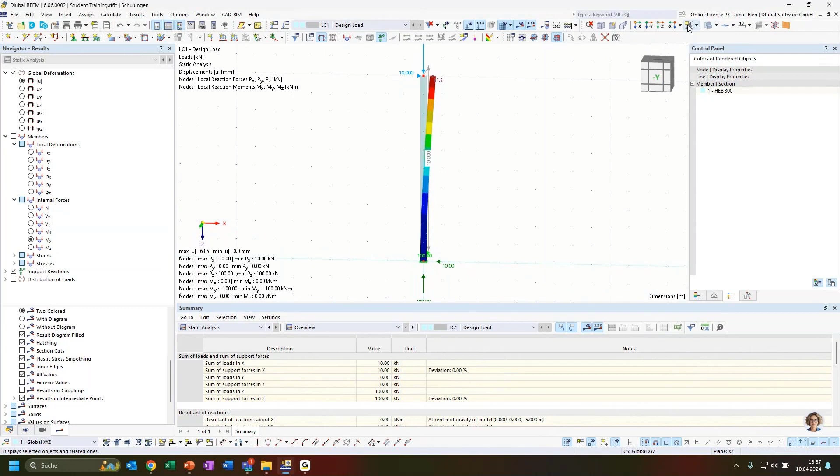Okay, now let's take a look at the deformations. Maybe I'll switch to the wireframe model so we can read the values a bit better, and here I want to show the deformation by lines. I see that the deformation at the column end due to this horizontal load is 63.5 millimeters.

So let's see what the effect would be if we calculate the same structure under the same load using second order theory. Therefore, I just go to the load cases and copy the first load case.

This also copies all load objects in this load case, so that load case would also have this load at the column end. Now I switch the static analysis settings for this load case number 2 to static analysis setting number 2. Let's take a look.

By default, when you open a new model with a basic template, we have three different static analysis settings predefined: the first for first order theory calculation, the second for second order theory, and the third for third order theory. The difference between second order and third order is that third order theory is also applicable for large deformations and large rotations in the model.

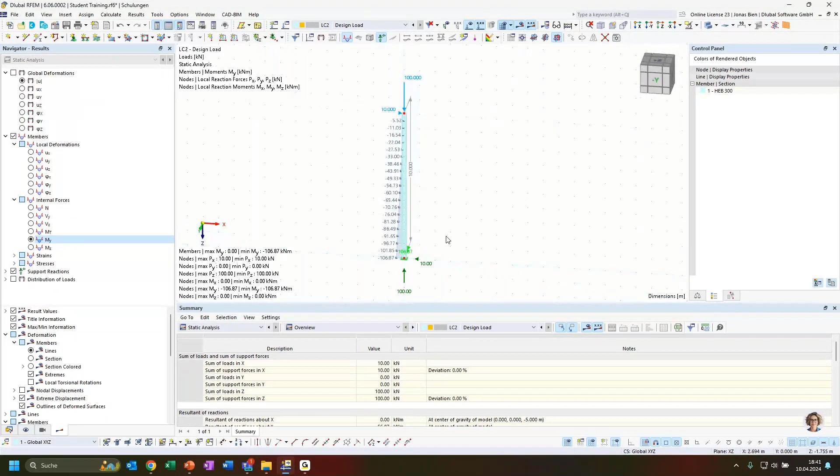So if we analyze the bending moment values, we see, and maybe we can also set the wireframe model to see that - oh, we can't really see that at the top node - but we see that at the rigid support, we have now an increased bending moment, and that increase of 6.87 kilonewton meter directly corresponds to our vertical load of 100 kilonewton times the horizontal deflection of the column at its tip.

So that would be 0.068 meters, and that would give us an additional bending moment of 6.8 kilonewton meter, and that is what we get as a result in our static analysis according to second order theory. So we get an increase of the bending moment due to the deformation at the column end and the vertical load that is applied.

I also want to show you how you can compare the results a bit more easily. You could, of course, always switch between the load cases to show the different results, but you could also generate a new window for this model.

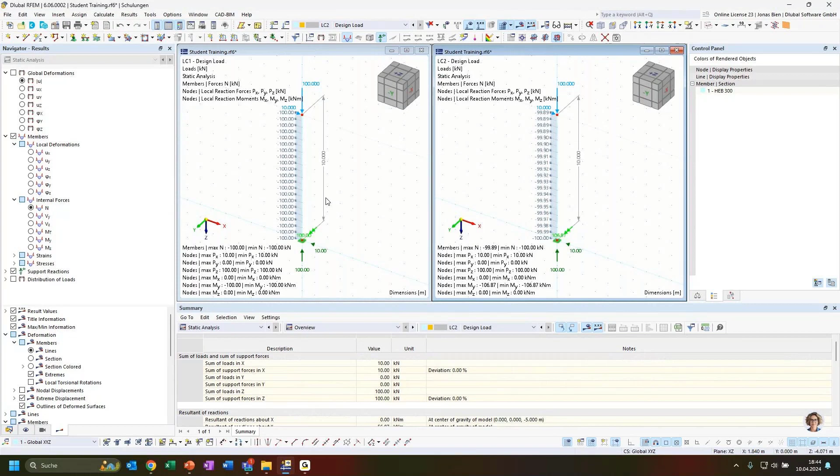All right, but let's switch to one window and concentrate on the next information I will give you.

So as I said, in this case, we have an increase of the bending moment of around 7% just by switching the analysis type from first order to second order theory. So that may be neglectable, I mean it's less than 10%, but it's still, I would say, quite significant.

And also the problem is that for such structures, the dependency between the load and the reaction are no longer proportional to each other when we take care of the deformed structure and calculate our equilibrium based on the deformed structure.

So, for example, we could now, in the second load case, double the load. And I want to show you, let's compare the reaction we are getting now. As I said before, we had an increase of the resulting bending moment at the column base of 7%. But now if we compare the results, we have an increase of almost 15%.

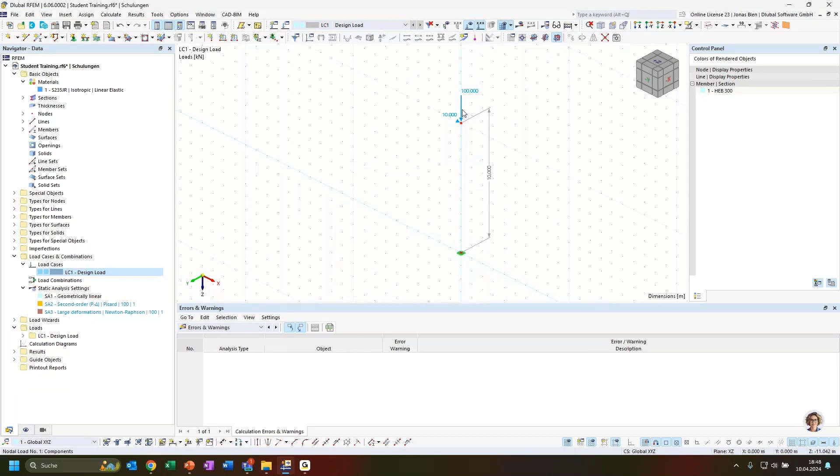So we want to more or less keep this statical system. We just want to remove the horizontal load for ease. So what remains is our 10 meter long column with a vertical load.

And we want to now investigate what is the critical load that makes our structure, or in this case only this column, unstable. And this particular problem is maybe already known to you.

It's basically a prismatic member under compression, under pure compression, with certain boundary conditions.

And this is also known in engineering as Euler case number 1. So Leonhard Euler, he dealt with such instabilities of members that are loaded in compression already in the 18th century, and he provided analytical solutions for such problems that we are now investigating 250 years later still.

And we want to use the solution of Euler, or we want to compare Euler's analytical solution for this problem, which is generally accepted among the engineering scene, and compare it with the results of our numerical calculation. So the next example, or the next task, is for this particular case, a clamped column under pure compressive load, to define the critical load factor of this cantilever column where it gets unstable.

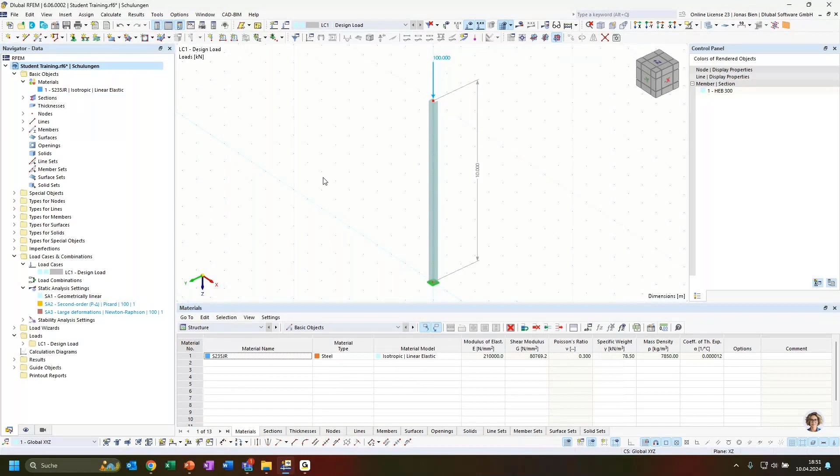When I activate this add-on in the base settings of my model, I get the option to calculate the critical load for a specific load case or load combination that I defined.

So in this case, I'm back to my loading under first order theory, and I want to calculate the critical load of my structure under this load using a linear bifurcation analysis, or eigenvalue analysis, and calculate the critical compressive force that leads to instability.

So I can activate this critical load calculation here in the load case or load combination tab. I have no load combination, but I could do it the same way there. And then again, as for the static analysis settings, we have two predefined stability analysis settings.

And again, as before, we can see what the options for the settings are, and can of course alter these settings. I can choose between linear eigenvalue analysis, which we want to do in this training, but there are also other options to take into consideration non-linearities of systems. So we could also use an incremental method, but that should not be subject of today's training session.

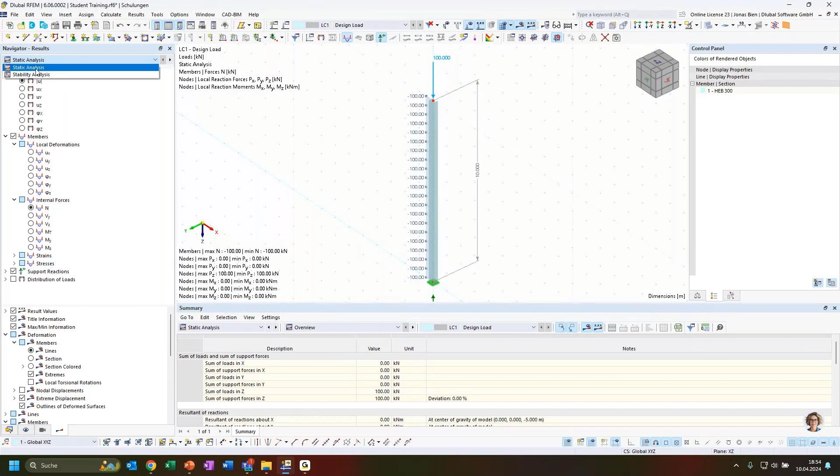We can choose between the results for the static analysis. That is what we have investigated so far. So we have investigated the deformations and the internal forces and so on. But we now also get the results for the stability analysis.

And this is interesting because it gives us the critical load factors. These are the factors that we can multiply the external loading with in order to get our instability load, or the critical instability load that leads to an unstable system.

And we also get them in this drop down here, and also in the table. Then we also get a magnification factor. This is basically a value that can be sometimes used to determine forces according to second order theory by just multiplying first order theory internal forces by that factor.

In some codes, for example in steel design, this is sometimes allowed, as a way to calculate second order theory bending moments without actually calculating according to second order theory. But this is not very commonly used.

I just want to highlight that this magnification factor here is denoted by the alpha value, and sometimes the alpha value is also mentioned as a parameter for the critical load factor. So I just want you to not confuse this critical load factor, which is the multiplier for the critical load determination, and this magnification factor, which at the moment is not very important to you.

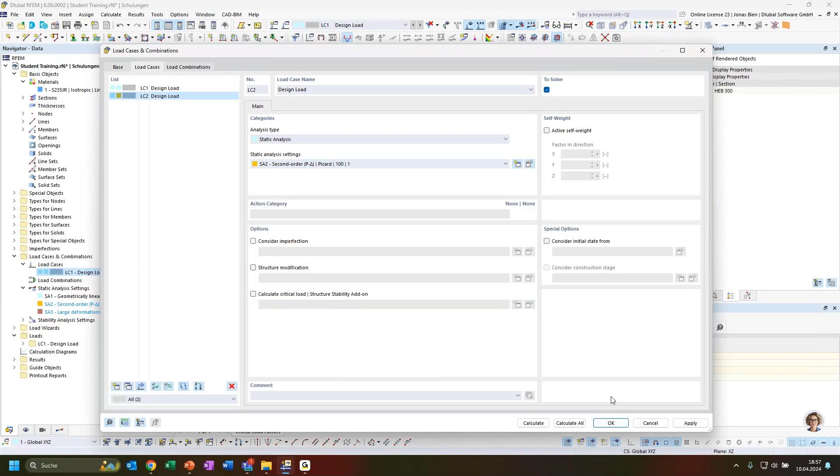So we can check that by just again copying this load case, performing a second order theory calculation, and adjusting the vertical load to 434 kilonewton. And this should still give us a stable solution. This should still work. Okay, you see it calculates and we get something.

But now if we increase the load just slightly to 435 kilonewton, let's see what happens. We try to solve the problem. And we are still able to solve it. Okay, that's unexpected.

Let's analyze again. I messed up the number, so it should be 444 kilonewton, which shouldn't work anymore. That's above our critical load that we calculated with our structure stability add-on, and this should actually fail. And it does. Now it just gives us the error message that the structure is becoming unstable, and we cannot find a solution when we want to calculate this according to second order theory.

So this is a nice finding with our stability analysis add-on. We also get a third and a fourth eigen mode, which are higher buckling modes of the member. These aren't really interesting for us, because in the end, most likely the critical load factor for a structure will be the smallest one.

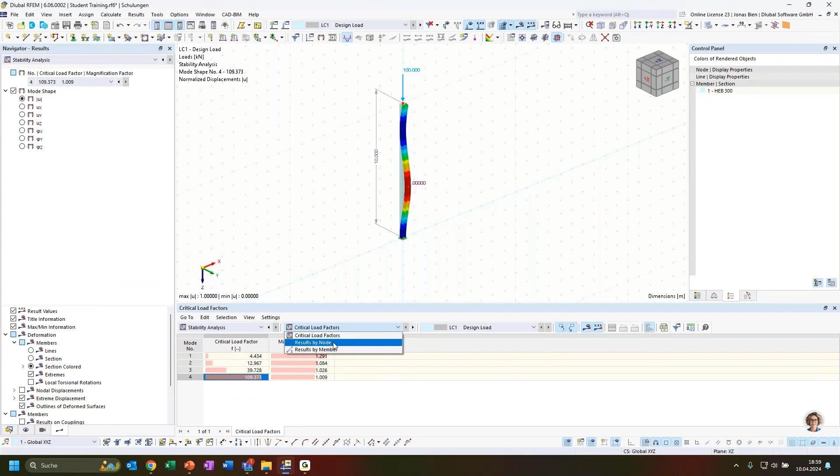But the critical load factor, and also the eigen shape, are not the only interesting outputs of the analysis. We can also go to the results by member table, and there we also get effective length factors and effective length values that we can use for stability design of this steel column.

So if one of you has already performed a steel design or stability design for buckling of such columns, you've probably used the equivalent member method. By using this method, you need a critical buckling length as input. This critical buckling length is actually calculated for you for a particular system by our stability analysis add-on.

And what is done in the background is quite easy. That would be the Euler formula that Euler determined for the calculation of the critical buckling load for those simple column systems.

When we know our critical buckling load, determined by our eigenvalue analysis, we can rearrange this formula to determine our effective buckling length. For this particular Euler case number 1, L critical, or the critical buckling length, should be taken as twice the system length.

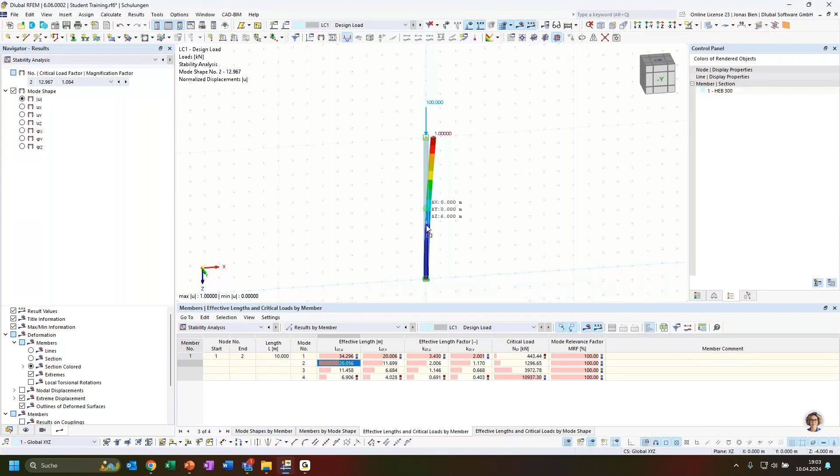For example, from this column, and this is the very last example, we could turn this into a simple moment resisting frame. I will just duplicate the columns and add a girder to connect these two columns, apply 100 kilonewtons to each of the columns, and now we could do the same analysis that we've done just before, with just one column.

We could even go so far and leave the length at 10 meters. It's not exactly what the example asks us, but anyway, we should get a solution for this, and for comparison reasons, it's probably nicer to keep it as it is.

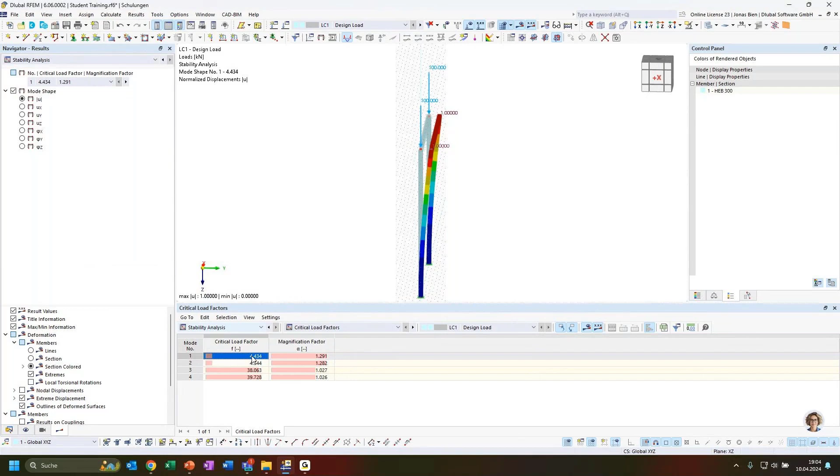So again, we would calculate our stability analysis results, and what we get here as critical load factors is quite interesting, because we see the first critical load factor didn't change at all. For buckling around the weak axis, it didn't help the system that we now have a second column connected by a beam. The whole frame would buckle around its weak axis and have the same critical load factor as before. But let's take a look at the second mode shape.

This would be asymmetric buckling, but also out of plane, around the weak axis of each particular column. In this case, the girder also wouldn't do much. But now, when we analyze the third mode shape, that would represent in-plane buckling of our frame that we just generated. For this kind of buckling, the critical load factor increased from 12 to 38, because we've built a frame, and this girder, this horizontal member on top, actually increases the stability of the system significantly.

That we can already see by analyzing the critical load factor for buckling around the strong axis of the columns. We could also read this for such a more complex system, it's still quite easy, or a simple structure, but still we could imagine an industrial hall made of frames, and analyze the effective length the same way.

We could actually now, for our mode shape number 3, which represents this in-plane buckling, derive our effective length factor for the equivalent member verification check for this steel column from the Steel Design add-on, and in this case it wouldn't be 1 or 2, which we would get for Euler case number 1 or Euler case 2, but some value between.